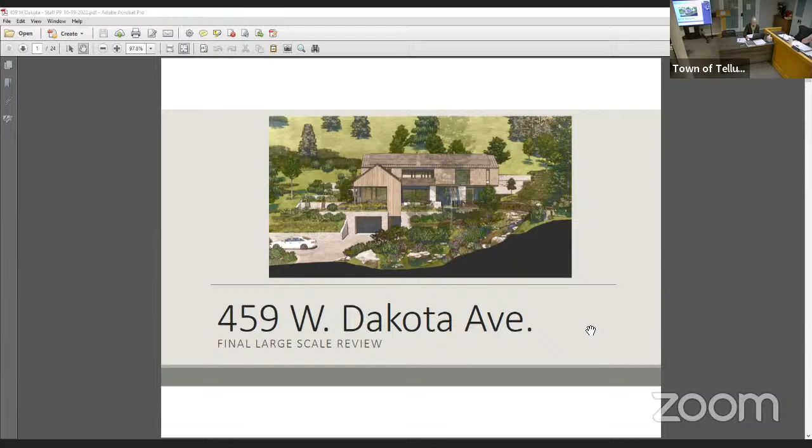So I will orient you to the site, which is located on the north side of Dakota Avenue, adjacent to Cornet Creek. It is outside the historic landmark district, inside the historic preservation overlay district. The zone district is hillside transitional, and the treatment area is transitional hillside with River Park corridor overlay because of its adjacency to Cornet Creek. Also because of its adjacency to Cornet Creek, there is a 25-foot wetland setback, which has been approved by the planning director, and will be approved in a final state after HARC's approval of the final development.

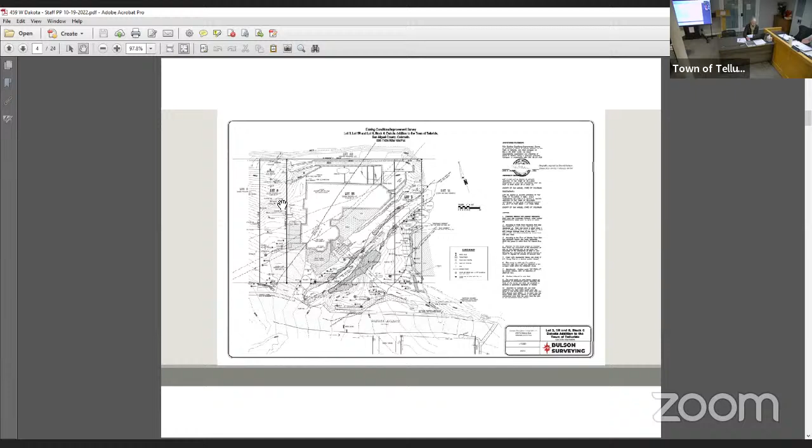There are 3 lots here, lot 3, lot 5R, and lot 8, which are all under the same ownership. In the new development plan, there are improvements planned for lot 8, which are more outdoor terraces and patios.

The existing house, known as the Nutmeg House, was built in 1987 and is not designated historic. It contains about 5,200 square feet of floor area, well over today's maximum allowed floor area of 4,000 square feet. The existing house encroaches into the wetlands along Cornet Creek. As fantastic as this house is, the architectural style and character probably wouldn't be approved under the current design guidelines if it were seeking HARC approval today.

So the proposal is to demolish the existing house and construct a new single-family house in its place with a similar but smaller footprint, respecting the wetland setback. The demolition of the house was approved on November 17th, 2021, subject to approval of the final development plan, which is what we're reviewing tonight. So there's no further action required for the demolition.

And the bridge over the creek, as it exists now, will remain. At the preliminary approval on November 17th, 2021, the application was approved with 11 conditions, which I will go through, starting with number 1.

If any trees are removed other than those shown, they will be subject to a tree removal permit and any required mitigation fees. There was some conversation about this in the applicant's revised narrative, which I'll talk about in just a minute, because this is a condition that has been retained.

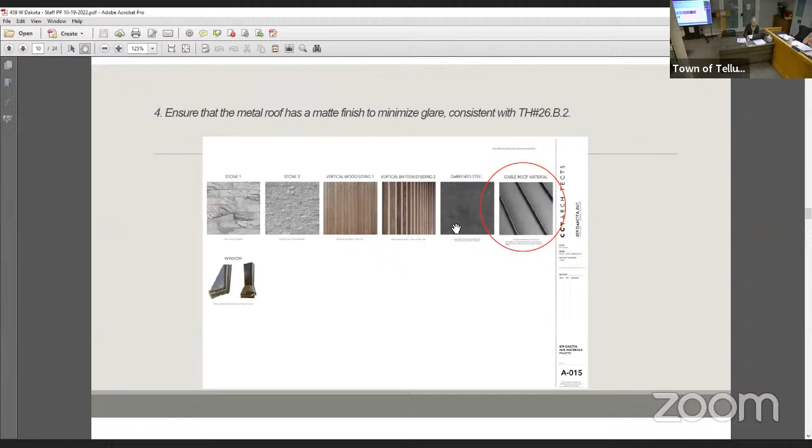Condition number 4 was to ensure that the metal roof has a matte finish to minimize glare. Previously, they had proposed a different material, zinc shingles, I believe. That's been revised to bonderized standing seam metal, which has a matte finish.

Condition number 6 was to revise the skylights so that they don't penetrate the ridge line. They did previously. The skylights have been moved onto the north slope of the roof so that it no longer penetrates the ridge. Condition number 7 was to revise the doors so that all doors are no more than 2/3 light. Details of the doors have been provided in the packet, and they are shown to be solid or no more than 2/3 light.

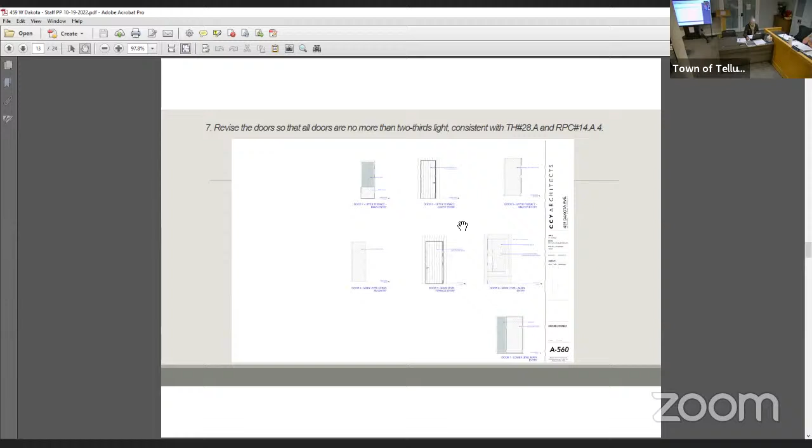Condition number 8 was to provide solid deck railings on the east side deck. Previously, it was an open, transparent railing. The amount of railing has been reduced, and the railing is now solid steel panels.

Condition number 9 was to incorporate traits of historic buildings in the town at large, such as eaves, overhangs, alternative roofing material, breaking up the ridge line, modifying the south building facade to become more traditional versus the cantilevered window.

Condition number 10 was to reduce the size and appearance of the driveway as seen from Dakota and add landscaping. As I mentioned before, it appears that some of the driveway maybe has been reduced, the pavers have been added, but there is a significant amount of landscaping proposed along Dakota Avenue between the street and the house.

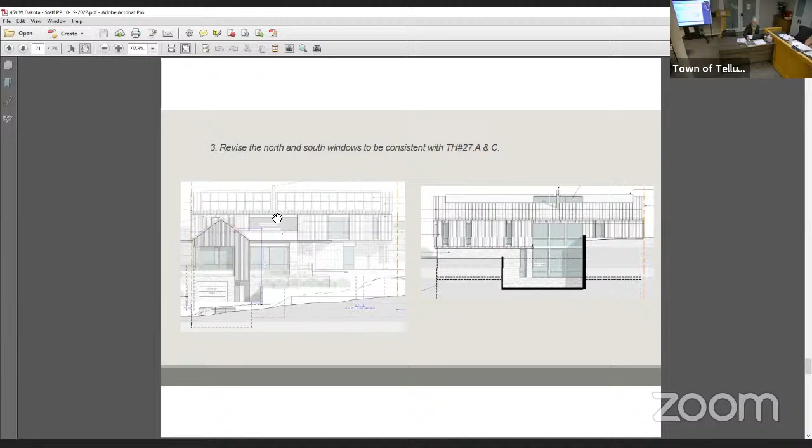Condition number 3 was to revise the north and south windows to be consistent with the guidelines. The applicants did a good job reducing the glazing on the east and west sides, but added it on the north and south sides. A large amount of glazing was added on the north, which won't be seen from town or Dakota, but will be seen from the Jud Wiebe Trail. Additional glazing was also added on the south, with an open covered deck on the south facade.

Condition number 4 was on upper level decks and balconies: change the can lights and wall sconces to step lights. Any fixtures above ground level should be step lights.

Condition number 5 was to use the lowest wattage light fixtures possible and as few fixtures as possible on the bridge and in the area of the creek, because it's in the River Park corridor overlay where there's great sensitivity to light spill. Condition number 6 was to limit the number of can lights at the garage. The guidelines recommend not duplicating fixtures to light the same area.

Condition number 7 was to ensure the solar panels do not extend above the ridge line. They did extend above it in the revised plan set I received a couple months ago, and I asked that they be lowered. I don't know if they were lowered or if ridge cap was added, so that should be clarified. It still appears the solar panel racks or frames extend above the ridge line, so I want to make sure that's addressed. Condition number 8 was to ensure the solar panel racks and frames are non-reflective.

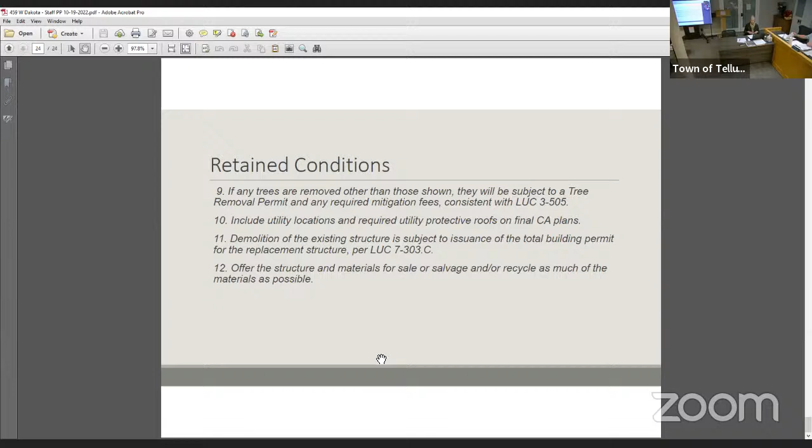Okay, questions for Jonna? Just go ahead and speak up. It's all quiet here, Mark. Yeah, I have one.

You mentioned it in the memo, back to our old condition number 9, which we will talk to them about, but it appears they did none of those five things. My real question is, even though there's not a ridge length maximum as in many districts, we asked them to break it up. I think we were going under the context of the neighborhood, being right next and adjacent to the historic district. Did that happen? I wondered why you didn't make that a continued condition — you suggested we talk to them about it, but did you not feel strongly about it?

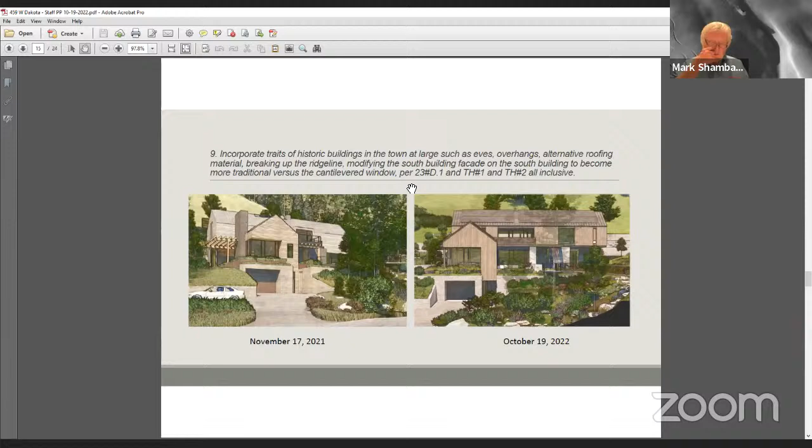I don't believe this was a staff condition at the preliminary review. I think it came out of HARC's discussion with the applicant, during deliberation, and from comments from the neighbors. As I mentioned, I feel the design is very specific and intended to be very contemporary. I think clearly the design intent is to keep it contemporary and not add eave overhangs or traditional materials, because that's not what they're going for.

So again, I hope you'll have that conversation. I'm sure that the applicants will talk about it as well. Okay, all right, well, unless somebody else has a question, let's move on.

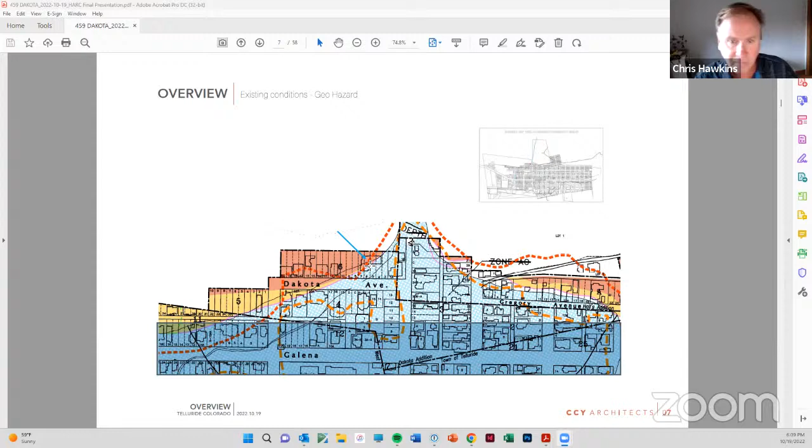So when you're looking at this, you can see a bit of the town's wetland setback applied, and then on top of that you've got the floodplain coming through the site, and rockfall in the back, which is easily mitigatable as we all know. What you end up with, if you look at the wetland setback and rockfall setbacks together, is a kind of triangular shaped lot that has really influenced the proposed cross gable design of the house.

So John went over all the nonconformities - the height greater than 40 feet, the floor area is about 2,000 square feet over, and it's non-conformant with floodplain and wetland regulations as well as HARC guidelines.

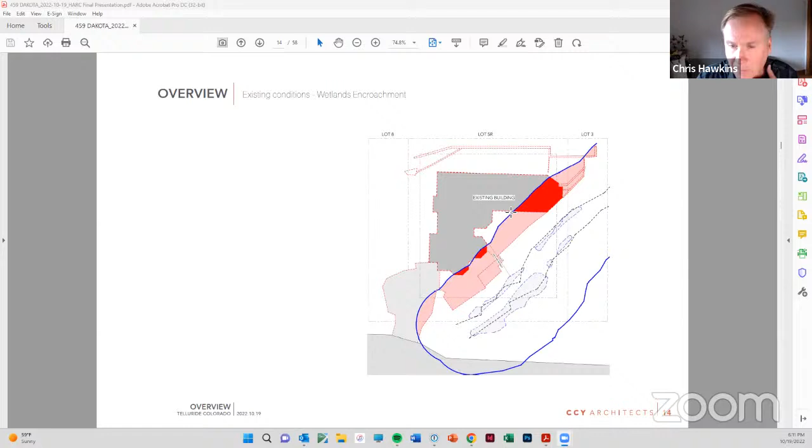These are the existing wetland setback encroachments, and the proposed house - this shows the existing encroachments, and then the proposed house is pulling this well outside the wetland setback area, creating a much better situation overall. Part of this was an approval already granted by town staff, where there's just a minor portion of the driveway encroaching here, a bridge, stormwater infiltration in this location, and some limited roof overhang. So under the proposed design, if you could please let Alex share his screen, I'm going to stop sharing.

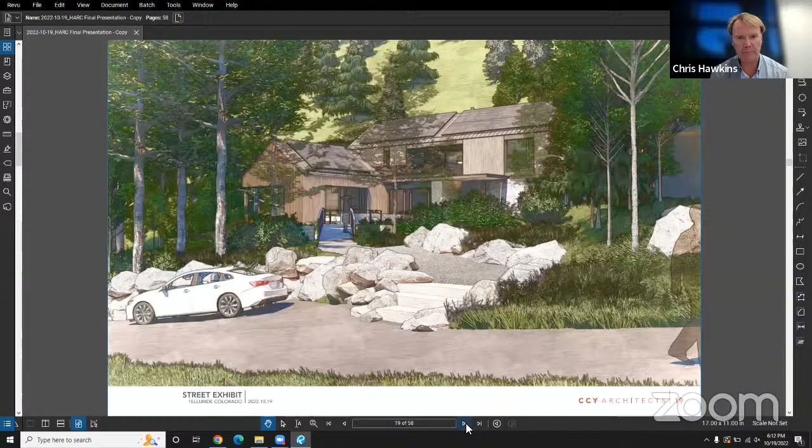The street view walking down Dakota, looking at the project. I think since preliminary, there have been a number of developments to the project. At the time there was quite a bit of discussion about level of character and interest, so we'll walk through a number of details later as far as how we addressed specific details. But largely, we're adding a lot of texture to the siding on the south, east and west ends of the gable, and breaking up the roof plane and ridges with the addition of solar panels and ridge caps, and the incorporation of eaves, rake details, and some window trim that we've looked at.

Maybe back up two real quick, Sean, if we could. I think one big development—all right, there we go.

That's perfect, next one. One big development that wasn't present at preliminary was the carving out of the deck on the upper form, which previously was a little bit stark. This adds quite a bit of depth and character to the building and breaks up the mass along that east-west portion of the gable.

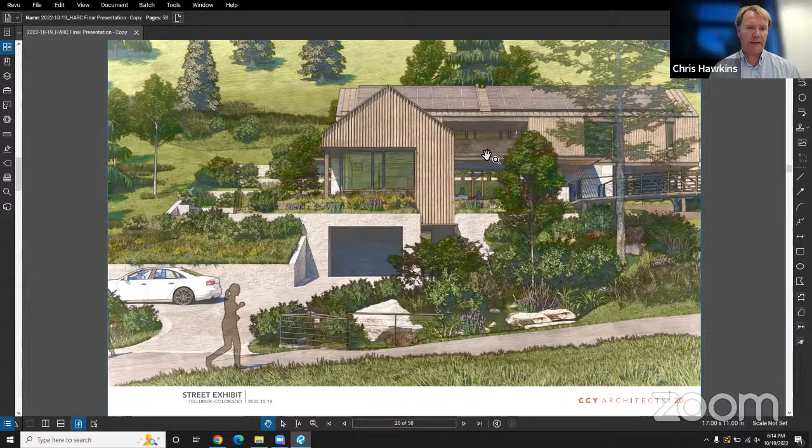Material-wise, I think similar to preliminary: a strong stone base locks to the earth, and more light tone woods for the upper portions of the gable. There are black accents in steel, and the roof is a bonderized standing seam, meant to be matte and neutral tones of gray, with matte solar panels making up quite a bit of the roof surface, but I think also adding interest and definition to the roof forms.

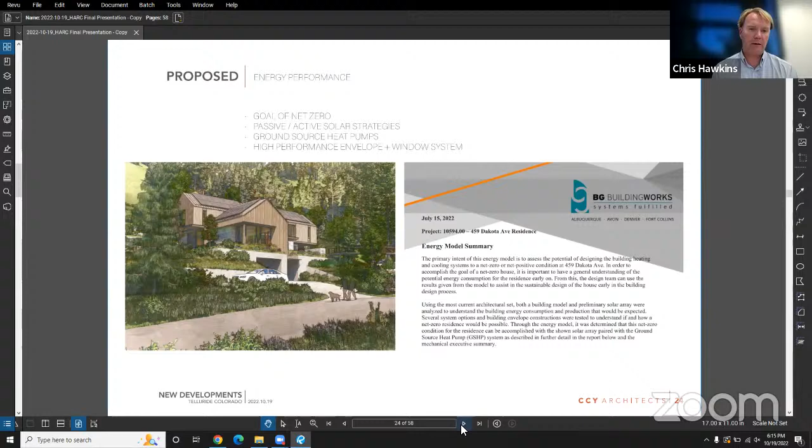I think I saw that Sheri is on to talk through some landscape developments. Or Sam. I think the clerk would have to allow them to speak for Sam. Yes, and she just did.

Hi, this is Sheri from Blue Green. Thank you for allowing us to speak about the landscape and planting design tonight. As part of final review, this is really the opportunity where we can present the planting design, though at our preliminary review we did present a lot of the design intent and the concept, which I think is really beautifully presented in these renderings: to incorporate native trees, including ones already on the site and within the creek corridor, shrubs and perennials, to really tie this home into the surrounding context and into the creek scape itself.

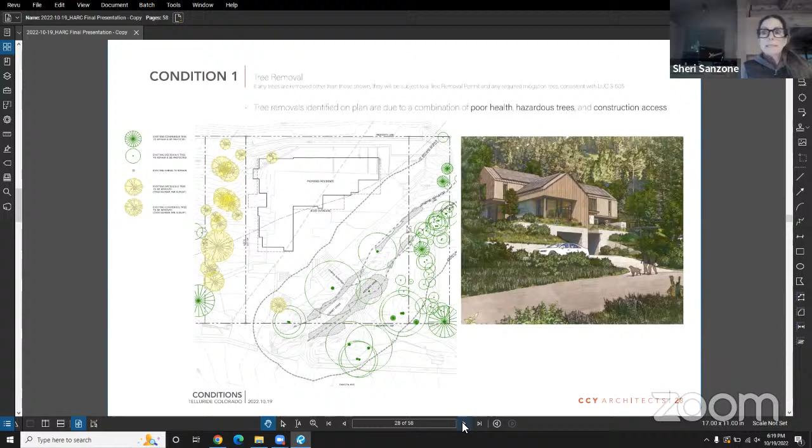Great. And then also as part of our more detailed review tonight, the topic of site drainage and how we comply with the code is one that we wanted to further elaborate. We described a design intent at our previous meeting which allowed for on-site drainage, so we're meeting that code requirement.

And as Jonna described, we looked at your suggestion for permeable pavers for the driveway and have incorporated those into our design, which is, thank you, our next slide. That's part of our pervious system as well to help treat water. So we're very excited by that.

Earlier tonight, Jonna asked if our driveway has increased in size. Basically, we've pushed and pulled the driveway footprint to best address both vehicle movement and foot traffic as one gets in and out of a vehicle or comes up the driveway to the lower secondary entrance. We feel like we've really maximized that, and we believe we're a wash. We might be 10 square feet over what we showed last time, but we're very close. If that's important, we can continue to look at that to get back down to the number we presented previously.

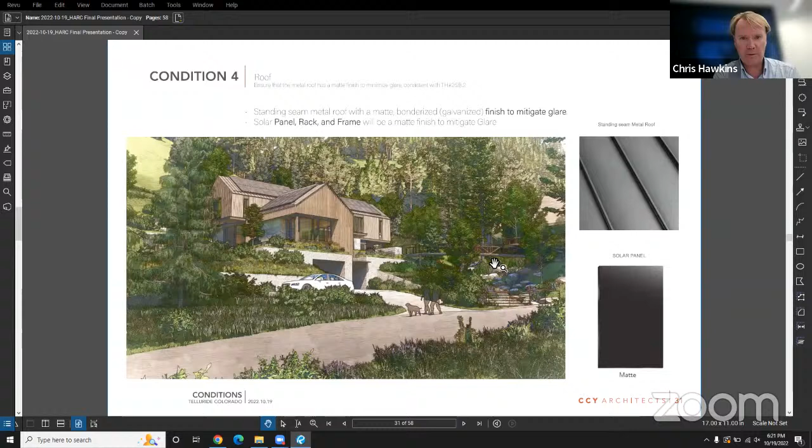Changing back to architectural features, condition 4 of our prior review was non-reflective roof materials. As I mentioned, we're committing to bonderized metal, as well as matte solar panels on the roof.

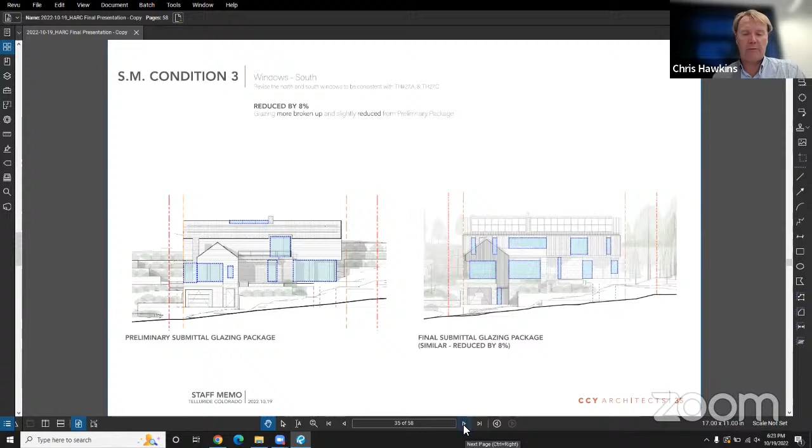We do think it's important to also talk about the north, and maybe even the next slide, Sean. So on the north there is a concentration of glass. I think in totality there's a 12% overall reduction from the glazing package previously. John did mention the additional glass on the north, so there is a concentration there, but especially given the steepness of the site and the location of the site walls, we're anticipating those site walls capture any light bleed from that glass on the north. Given the steepness of the site, it's a condition where it rarely will be seen—even from the Jud Wiebe Trail, you wouldn't necessarily get the view that's on the left.

The skylight, at the time of preliminary, broke the ridge. We've since slid that, as John mentioned, onto the north aspect of the roof, taking it off of the south.

Condition 7 was about two-thirds light doors. I think John had mentioned, right, we are now either all solid doors or committed to two-thirds light doors.

Guardrail on the deck on the right—thank you, Sean—that has moved to solid plate steel as opposed to previously an open rail. There's also a reduction in that deck, quite a substantial reduction. On the left, blue is what's proposed, and let's click back—red is what was included at preliminary. By recessing that deck, we were able to pull that deck edge back further from the road and Cornet Creek.

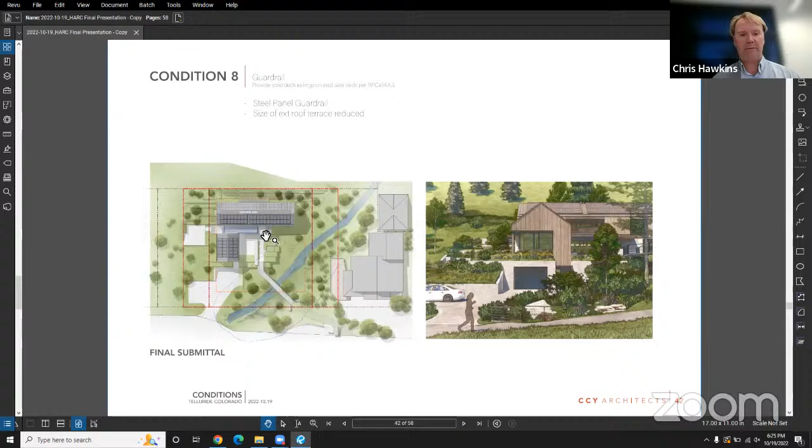So just a couple quick things on the character, right? We listened loud and clear to both some of the neighbor comments as well as the board comments on developing the character of the house.

We really took a good long look, liking the texture of some of the alley forms in town, as well as paying homage to the original design of the house, largely the existing log house. It's based on the texture of the logs, the texture of the window trim, and that type of thing. So we took that to heart.

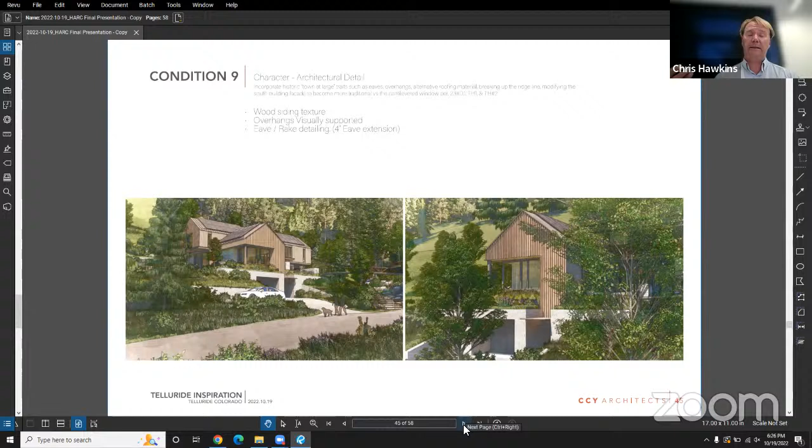We really looked at adding a number of areas of visual texture to the house, both in the siding on the gable ends, which has quite a bit of batten relief to it, to sort of take those alley textures in a way, but clean them up, trim them up, make them appropriate for a residential development.

And incorporating our eave detail that we mentioned, it's a current interpretation of an eave, not historic. As well, the rake of the roof, that textured siding really helps that rake of the roof read as an interesting detail. And like I mentioned, also the window detail in the center of the right image, that's a steel relief trim to add some depth and texture to the windows.

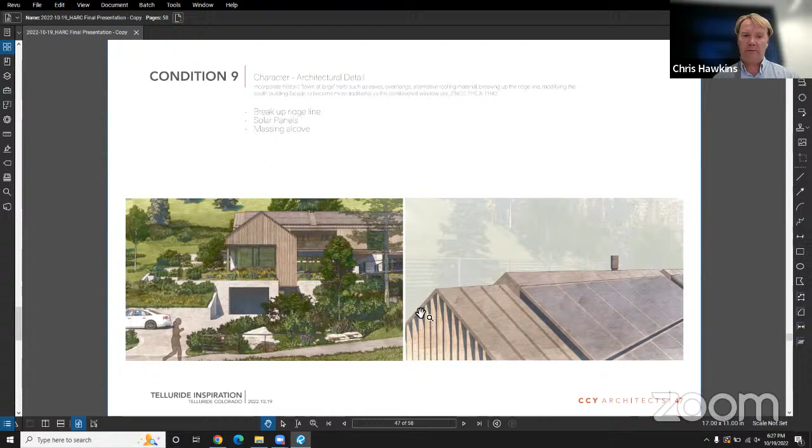So this is just a comparison of preliminary design on the left and then refined design on the right. We can see that alcove in the center we think is feeling very successful in creating some interest and intrigue for that portion of the home.

A couple other pieces to work through quickly. Staff memo, some of the proposed conditions that Jana had introduced. Stone, right? The concept is 2 types of stone on the house - basically from the main level down is the smaller coursed stone, more reminiscent of smaller assembled pieces of stone, and then above that there's a larger format version of the same stone.

Is that all granite? It's a gray. We don't have an exact species as of yet. Mark, right.

The wall distinction - if we read your memo correctly, Jana, I think what we included on the right was clarification that our wood siding is lifted up off the ground. So we've incorporated a 9-inch band of metal at the base so that wood siding doesn't meet the ground.

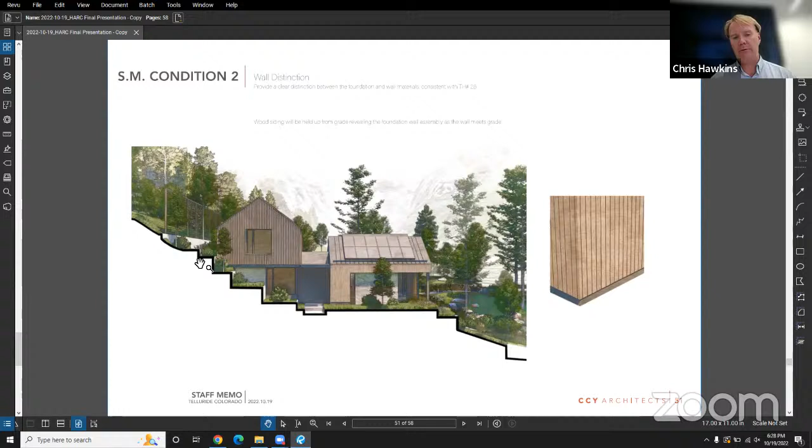Should we dive into lighting now, or do we want to leave it there and have discussion on those points so far, or should we keep going through lighting?

Well, tell us what you're going to do on number 4 to comply. Sure, so number 4 - the light fixture on the left was previously a wall sconce, and we're committing to a step light there.

Looking for board input on the 2 recessed fixtures, the downlights in the soffit. I think those certainly could move to wall sconces. I think a step light in that location with 2 doors entering that deck may not produce enough lumens. So we're looking for board input.

Can lights as well. It's just about the proper wattage.

Okay, so condition 5 was about the wattage of the light. I think we have very specific control over the lamps that go into these lights, so we comply with that. Is that 24 watts or less on the bridge and the open area around the creek? Correct, it is. All right, thank you.

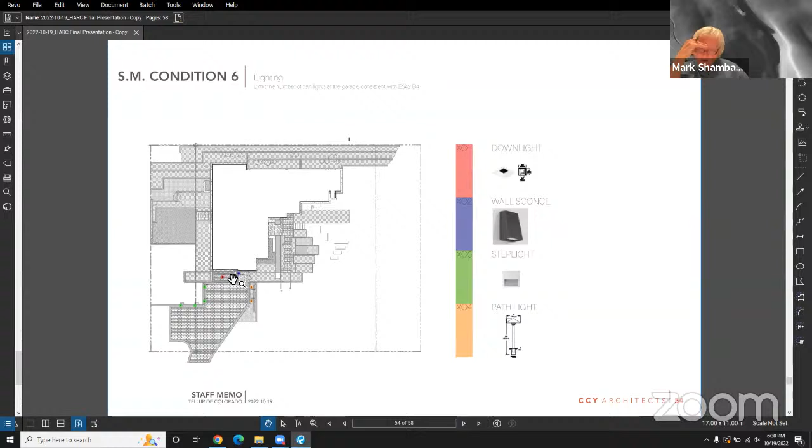And then I think there was a specific mention of the garage light. So right now we do have one downlight in the soffit above the garage doors, and I think that's a code requirement at a door. So we could look at a sconce there if that feels more appropriate, but keeping to a single light source is our intention.

Condition 7 and 8, I think the solar panels and non-reflective roofing are covered - no issues on these. And then 9, 10, and 11, I think all made sense to us as far as confirming that.

Lastly, commitment to salvaging as much as possible. Correct, and the letter on the right was from Paul Ricks on a deconstruction plan for the home and donation. So again, agreeing with condition 12.

Okay, that's what we got. Okay, questions, Rally?

Could we see the comparison of the preliminary and the final for the east elevation again, please? Yep.

Give us a moment. We're getting there.

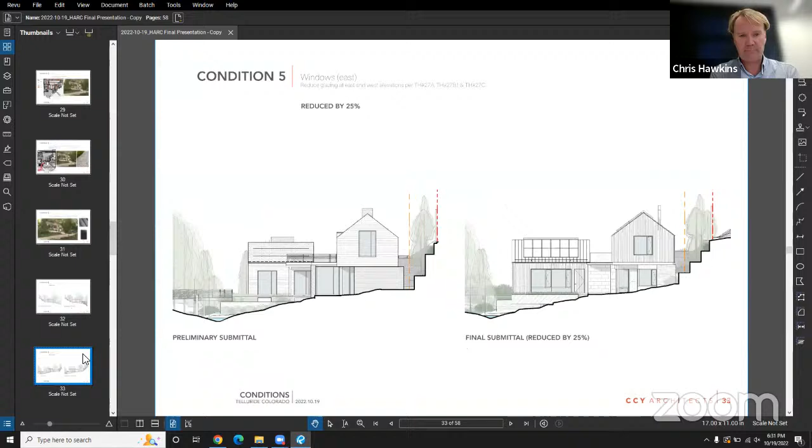So the deck shown on the preliminary between the two masses is no longer there. It's been moved further into the building. The deck previously extended further to the left to where the cursor is now, and has pulled back to the right to where the cursor is on the right image. So that's just over the connection between the two masses. Correct, yes.

Okay, thank you. I have a question, Mark. Go ahead, Matt. Chris or Alex, could you give us a measurement of the existing long roof ridge?

We're working on that, pulling that up for you. We can move on to other questions while they're pulling that up. Well, that was going to be mine. Okay, let me get you that info.

The old condition number 9 said to look at eaves and overhangs, and they've adjusted some things on the walls, and the eaves are contemporary, but breaking up the ridge line, I don't think they did. So I'm just curious what still could be done. I'm still troubled by that 75-foot mass.

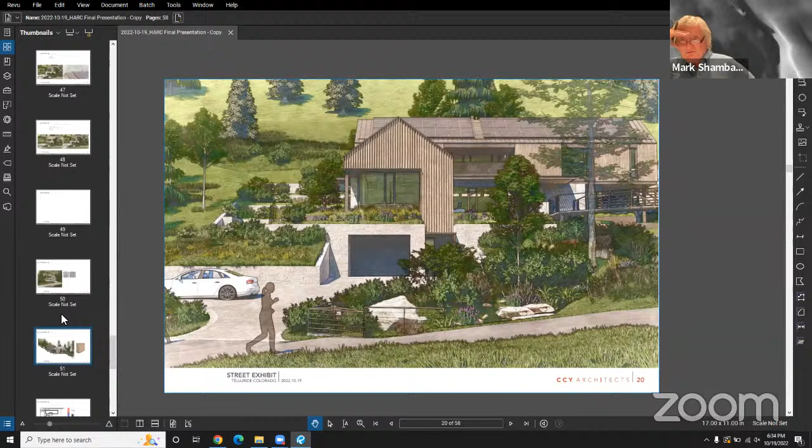I'd like the board's opinion on whether just putting some panels up there is really breaking up the ridge line. I don't know, I'd be interested in other people's opinion. But Matt, did you have another follow-up? I was just curious what the length of the existing roof is, it's quite long. I'm curious if they're proposing a roof length, regardless of the caps and solar panels, similar to what exists today or if it's different.

Great question, Matt. We can dig in the background here and try to get a length on the existing ridge today. Sorry, we don't have that, but on the new design it's still 75 feet. So while they're hunting that down, let's take other questions, as Matt suggested.

It's a good idea to just keep it going. Bob, could you address, on number 9, modifying the south building facade to become more traditional versus the cantilevered window?

Is that, I'm assuming, the large window on the west side of that building? It looks like it's been changed somewhat, but isn't it still a cornerless window, for lack of a better term? Yes, great point, sorry we glazed over that. So previously, on the preliminary as shown on screen, this was a true cantilevered corner with the structure hidden inside.

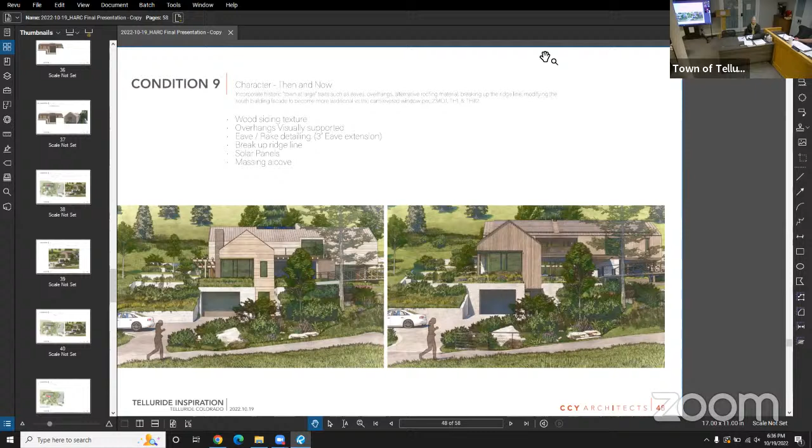Looks like there's a white element in between the column and the glass. So the glass is pulled in further as well. Correct, the glass was pulled to the right 30 inches. What we're seeing there in white is actually the sun hitting the fireplace mass beyond. We can look for a better corner view of that element to help describe it.

Or if you could zoom in on that right side on today's version, maybe that would help us a little bit. We have it in front of us in the packet, but still. Yep, there you go, that helps a little bit.

So Bob, there's some relief in receding, but that little column on the left, that's what was added new to give it a piece of structure, I guess. Right, and push the glass back. Correct, push the glass to the east. Yes, came to the right.

And you did say, or I'm sorry, the landscape architect, I don't recall her name, said that the driveway and parking area actually increased from what was shown before. About 10 square feet, she said.

About. And what the reason for that?

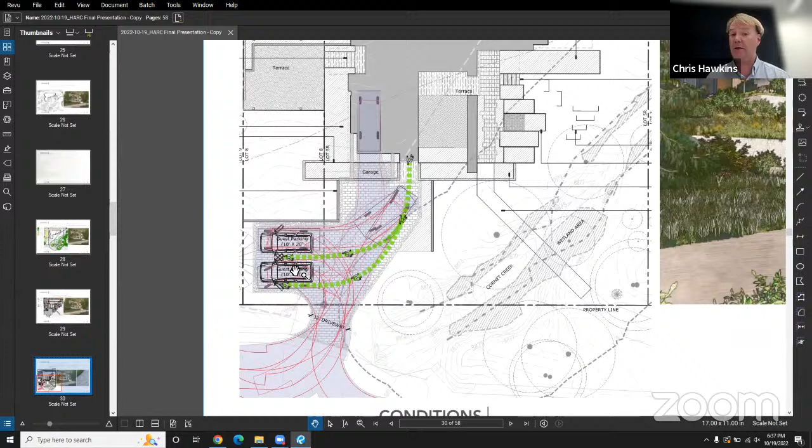If we go back to the turning radii, as we look at that diagram, this was a deeper dive with civil engineers to understand the turning motions of the cars and the vehicular turning. So while we hear you loud and clear on wanting to reduce that, these were our tests to make sure we were right-sizing it.

Did I do it? Good job, Sherry. All right.

So in checking the existing ridge length, going back to Matt's question, we're at 82 feet 9 inches is the existing ridge length of the home today. Okay, other questions?

Okay, if there are no other questions, let's hear from the public. So if you would electronically raise your hand if you would like to comment, now's the time. And I'm not seeing any. Piper, I don't see anybody, do you? I don't. Okay, all right, well then, seeing no public comment.

Thanks to the applicant, we'll go ahead and start deliberations. And as always, on 1 through 12, if you agree with all those, just let us know, and if you have any new ones, throw them on the table. So who would like to start?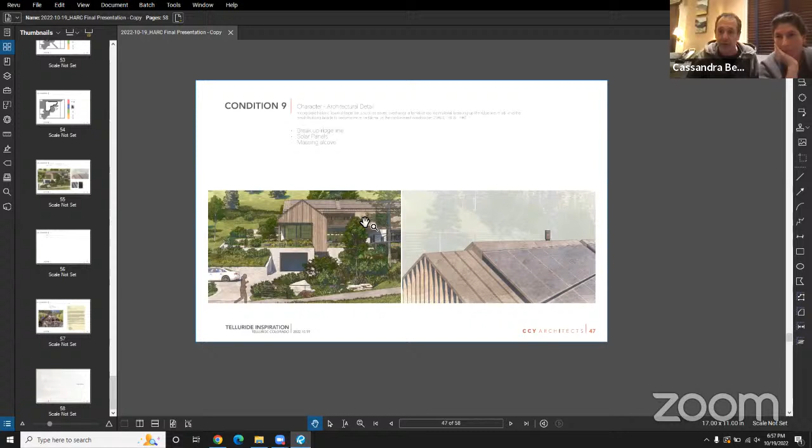All right, thank you. We understand your concern, and it's very close to approval now, so we'll go back to deliberation. I've got to ask if there's any other public comment. Are there any public comments? If so, raise your hand electronically. And if not, we'll finish our deliberations and make a motion here.

We last heard this in November of '21. I'm not sure what the delays were in getting to us, but we're here now. I think we agree it's approvable. I think we need to strengthen number 3, and I think we need to add a number 13. Again, there's nothing revolutionary about breaking up the ridge and reducing it; it's consistent with past rulings. That's one thing we take seriously, and we have asked for ridges to be broken up time and time again, so it's very consistent.

So does somebody want to try a motion? I'll try a motion, Mark. Okay, Matt. I move to approve the proposed final large-scale new construction at 459 West Dakota Avenue, lots 3, 5R, and 8, Block 6, Dakota Addition, based on the findings in the staff memo dated October 19th, 2022, with the following conditions. I'm going to try this 1 through 12 as stated, and I will open up for friendly amendments to address number 3 and the roof ridge.

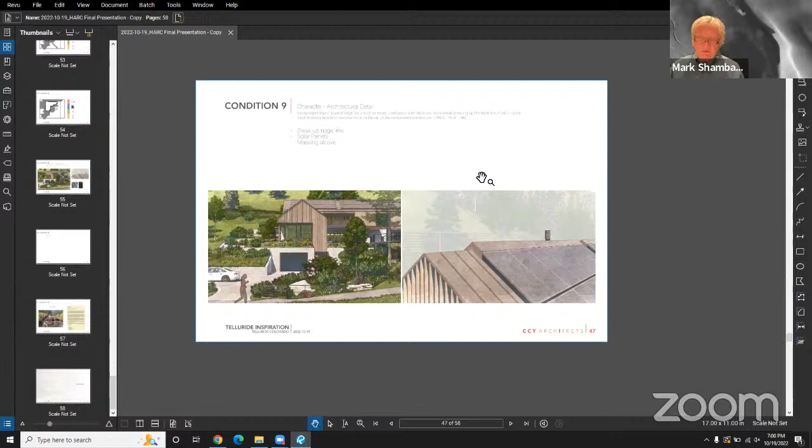Erica: Thank you. All right, this is the final large scale review at 400 West Pacific. Preliminary review was seen and approved at the June HARC meeting. It is in the historic residential zone district and the historic residential treatment area. It is located inside the historic district, and there are many rated structures in the vicinity.

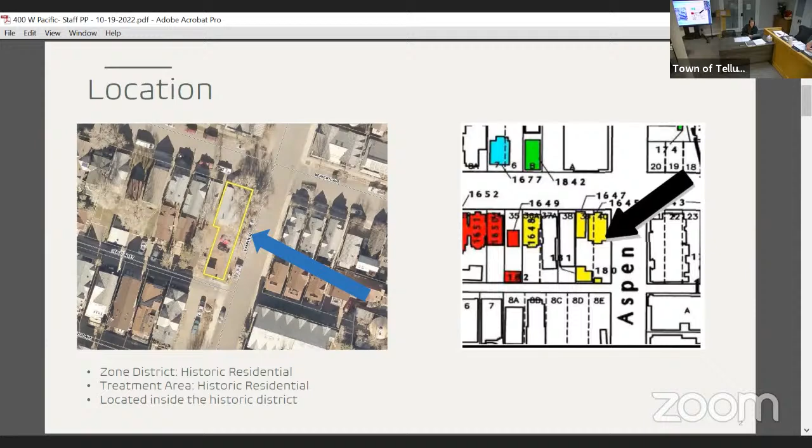The project description is the new construction of about a 1,500 square foot addition to the contributing house. Next we'll go through the conditions of preliminary approval from the June meeting.

Condition 1 was to provide a rehabilitation plan for the shed, including the treatment of historic materials illustrated on elevations, consistent with the rehabilitation standards and shed rehabilitation guide. A more detailed plan has been provided that staff is happy with. Condition 2 was to provide greater stepping down to the historic shed and street.

This condition has been retained. The overall height of the addition has been lowered, which does help with pedestrian scale and stepping down, but apart from the decks, there is no additional stepping down to the alley or historic shed.

Condition 3 was to revise the mass and scale to be not greater than the existing ridge height of the existing structure, and similar in mass and scale to historic structures found traditionally in the neighborhood. The ridge height on the addition is now the same height as the existing structure.

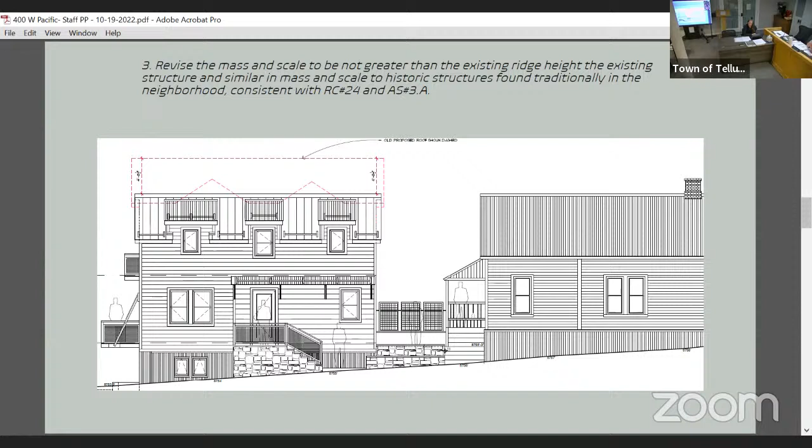Condition 4 was to install an approved protection device at the northeast corner of the historic shed. The protection device has been installed and has been indicated on the landscape plan.

Condition 5 was to increase the pitch of the roof to a minimum of 7.5 in 12 to match the historic principal structure. The main roof pitch is now 7.5 in 12, and the shed dormers are 4 in 12.

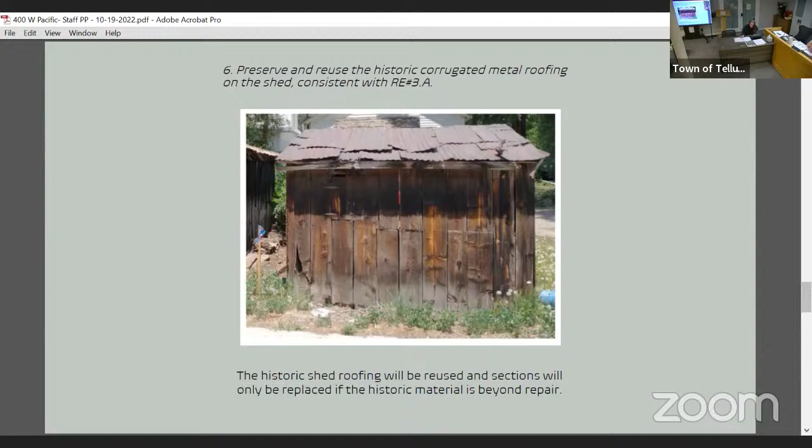Condition 6 was to preserve and reuse the historic corrugated metal roofing on the shed. The historic shed roofing will be reused and only replaced in sections if the historic material is beyond repair.

New proposed conditions. Condition 1 is to revise the windows on the west elevation to be a more traditional number and placement. The guidelines speak to placement and grouping of windows being similar to what was seen historically, and on the west elevation, it seems that the placement and grouping is rather untraditional, especially when compared to the historic house.

Condition 3 is to reduce the number of dormers, particularly on the east elevation. Dormers should be limited in size and number. The addition does have 5 dormers, with 3 on the highly visible east elevation.

Condition 2 was retained, which is to provide greater stepping down to the historic shed, alley, and street. Condition 4 is that the architect and contractor will meet on site with staff prior to the issuance of a building permit to discuss the shed rehabilitation plan. I'm happy to answer any questions before we hear from the applicant.

Okay, questions for Erica? I've got a question. Could you elaborate a little bit on number 2, as far as stepping down the structure? I think I brought this up at the last meeting. It seems to me that the new addition is 25 feet from the alley. So I'm curious if you could elaborate more on your concern about that. I could see the fact that it doesn't step down to the street, but with the alley, the decks, and the massing of the shed, it seems to me to step down. So could you give some more color on that?

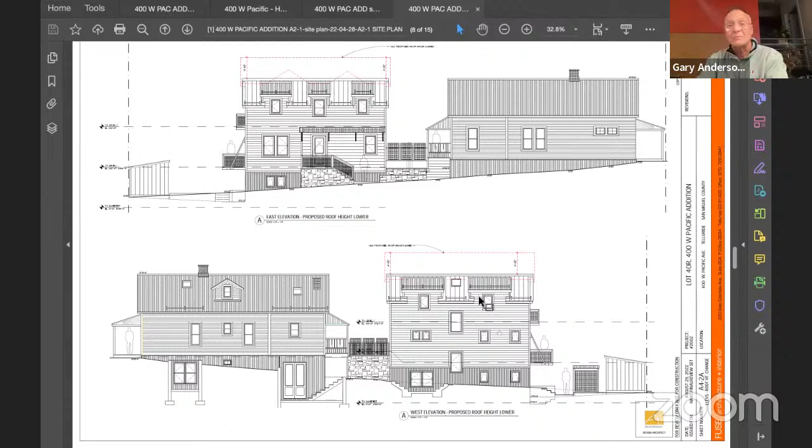So you heard my whole dribble about the placement of the windows, so I won't go over that again. I view them as windows that have been put into a barn where they need to be. There are fewer window types, slightly different proportions, because we want to bring as much light and natural air into the guts of the house as possible.

And to speed along back to where I thought I was showing you, this is a view of what you see from the public way. This is the barn at 406 that Dennis and I know very well, having been in and cleaned it out and discovered old motorcycles there. The view from the alley, a close-up view from the alley.

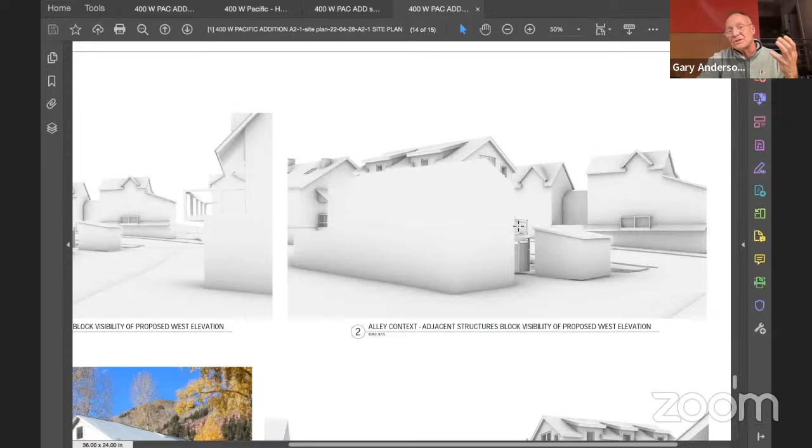Just a little bit later in the presentation, I want to mention this barn is important. It's an intermediate scale element that is proud, honest, and visible from Aspen Street. It creates almost a three-dimensional composition - it's a screen to the west side of the house, but also a three-dimensional element between the addition, the shed, and the alley. So that's my comment on the west elevation.

Do you have any questions before I go on to the next? No questions. Okay, I realize time is precious, so what I'd like to do, just to have an ordered presentation if possible, is go on to the dormer condition.

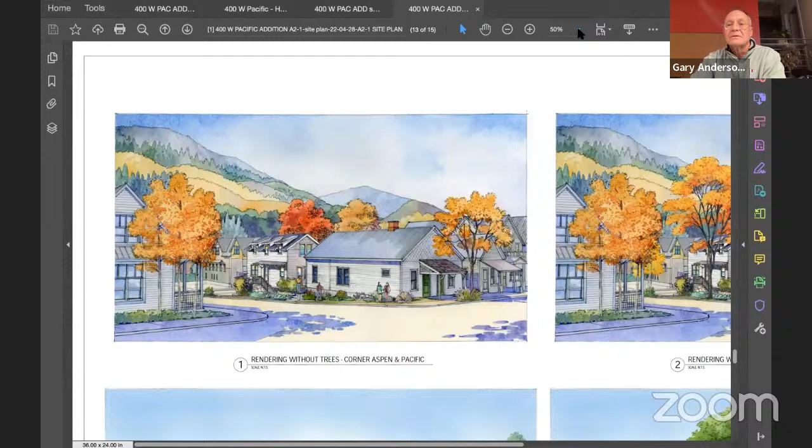You might not have seen these renderings, but I think this is a pretty good view - something that a lot of people will see when they walk from downtown.

We lowered the roof a lot. I mean, it wasn't easy, but the roof has been lowered over 4 foot 8.5 inches from the first time that you were kind enough to review it. We've lowered it to align with the ridge of the existing house by dropping 2 foot 7 5/8 inches, and we increased the slope of the roof to match that of 400 Front.

Dormers protrude in order to get any kind of usable space, with almost knee walls at the side. So what we tried to do was dormers that were simple, historic, simple horizontal shapes, very honest - not a gable shape, which raises an emphasis of verticality, but something that played well with the existing house. And once again, the great thing about the orientation of this house is east and west, but east isn't great if you can't get morning sun.

So the two dormers are for the bedrooms. The center dormer is to bring ventilation and light passively into the house and make it pleasant in the morning, and ideally to be a little perch for a window seat or a work-at-home desk.

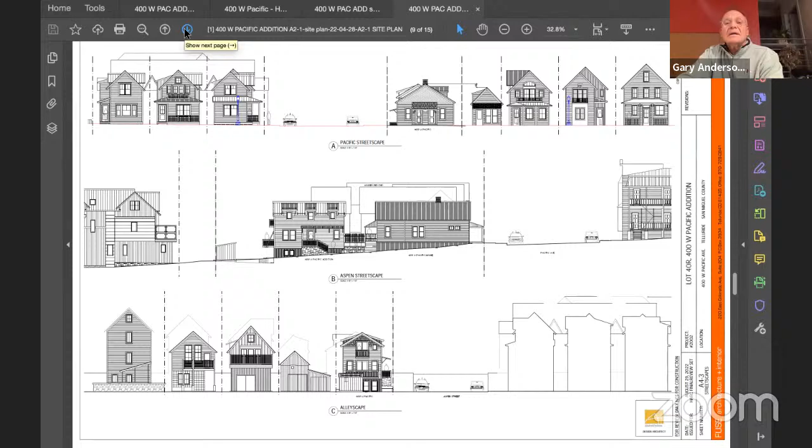Just one couple more images to refresh people's memory about this, which these are built conditions. These are the two houses that are directly - here's the barn, shed over here. These are the two additions that are taller than what we are requesting.

This is further down the alley, which is closer, taller yet. And another example, closer to the alley and taller. You all know these buildings, Peter worked on them. These are across Aspen Street.

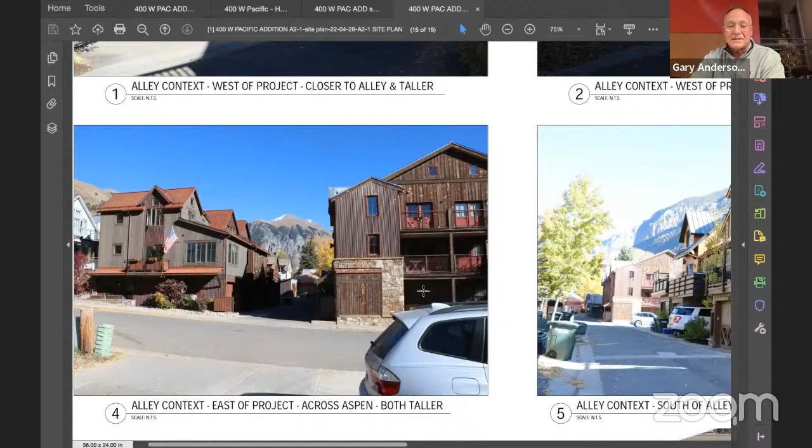The addition overlaps something like this that I'll show you in the aerial photograph. And then the bigger buildings that escalate down to the hotel with the many roof forms along.

And then this is the south side of the street - we don't know what's going to go in the southeast open lot directly behind, but this is what's along the street, which it's stepping down to the street, but it's not giving any elbow room. You have to crane your neck to see up.

And then just as one final comparison, this is the plan overlaid in the historic district. This is what's surrounding it. These are the two houses I showed that are closer to the alley and taller, that don't have the benefit of a shed in front, don't have the benefit of a historic barn out to the property line.

These are the houses that directly abut to the south. This is an older photograph, so it's not filled in. And then these are the houses that step down to the alley at the property line, but with full height here, which is midway through the setback of our house.

Thank you for your time, thank you for your patience. We've passionately worked on this. Dennis has been a dear friend, adventurer and patron for many years, and we're trying to do the best we possibly can for him. So if you have any questions, I'd be pleased to answer.

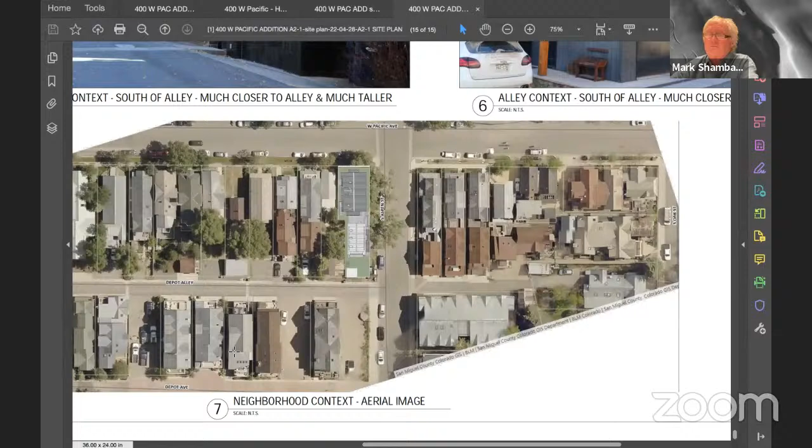As always, is there a consensus with Erica's items, conditions 1 through 4? If not, speak to it. And if there are any additional ones, this is a recommended vote for final approval here. I would - I'm sorry, Mark. Nope, go ahead. Number 2 and number 3.

I'm having difficulty when you look at this build. I did see the video, and I know this has gone through a number of iterations, and each one seemed to improve it. And I know Stacy mentioned in the last meeting that they addressed certain issues and created other issues with it as they proceeded.

This, I'll take the first one. I don't know how you could step this building any more than it is. It's pretty tiny, and you have the decks, you have the space between the sheds. So I can't see stepping it down anymore.

Do you recall we went on a bus tour some years ago? You were on it, yeah. And we stopped at - it's a greenhouse, I think it's on, might be Alder and Galena. And it has a garage and then 2 floors above it, all on the same plane with a deck. And I remember clearly that the interpretation at the time was that the deck doesn't necessarily break up that vertical plane of 3 floors. This is the same condition.

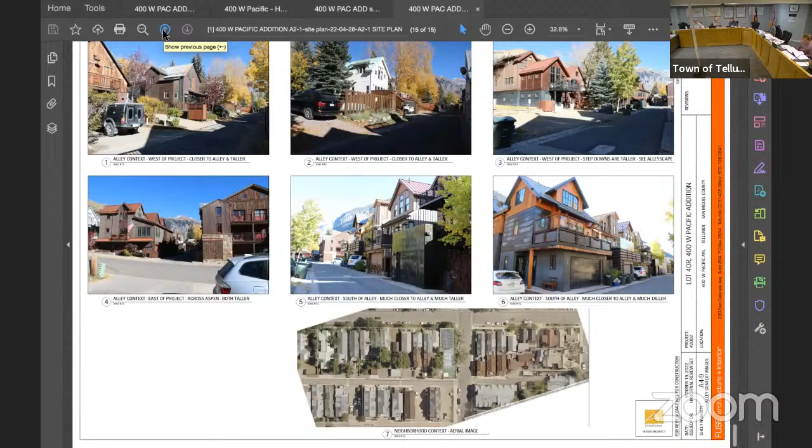And then the dormers, I don't know, I don't really have a problem with that. When you see this perspective down the street and look at what they're trying to do inside, I don't have an issue with it. I'm not as concerned either, and this is my reasoning. We did, based on the idea of subordinate to the historic principle, push that ridge down, like the applicant said, substantially.

Yeah, those still need to be functional spaces, and the way to do that is with these shed dormers, and they're not gable dormers, they're shed dormers. They're as respectful as they could possibly be. I mean, reduce it to 2. Take the one out of the middle of the stage. Yeah, well.

I mean, that would certainly do it, right? Yep, reduce it to 2, done, check. They could simply sort of mirror what they're doing on the... Are we trying to design this project for them? Or are we just gonna approve the 4 conditions and get on with it?

So, in light of Karen's comment, I could strike 2, leave 1, 3, and 4 in place and approve. I would agree with that. I actually would, slight change.

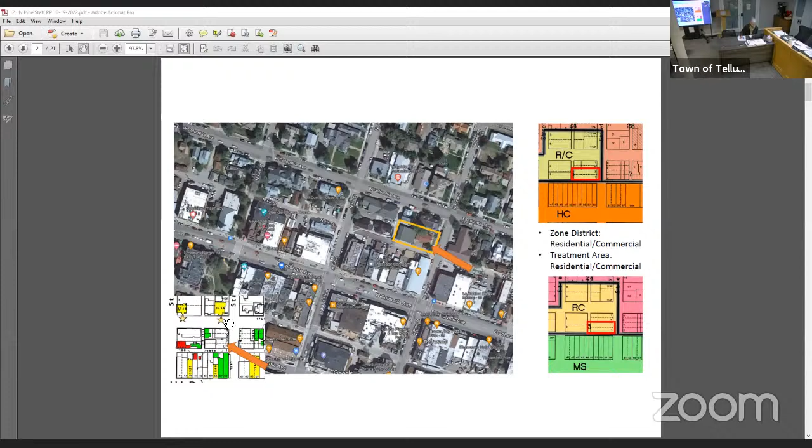It's in the residential commercial zone district and treatment area, but adjacent to both the historic residential and historic commercial zone districts, and historic residential and Main Street treatment areas. There are a few designated historic properties on the block, seen on the historic structures map. Currently on the site are a non-designated log cabin, built in 1938, and a non-historic storage barn, built in 1982. Both are to be demolished. The demolition was approved at the April 20th meeting, contingent on the approval of the final HARC application, so no further action is required to approve the demolition tonight. On July 20th, HARC approved the preliminary application with 13 conditions.

Condition number 1 was to further break up the massing along the south facade through stepping down to the west, providing relief in the wall planes and varying the materials from the east unit to the west unit.

The stepping down to the west, towards the rear alley, has not been significantly increased over time. It was slightly improved between the April and July proposals, but hasn't been significantly changed since July.

The materials along the south facade between the units and the 2-car garage have been revised and have helped break up the massing. The garage module appears more as a large connector, which helps break up the massing, and the garages have been further set back from the alley with overhangs, which help the pedestrian scale. But this condition has been retained to still try to help step it down a little more to the rear, to the west.

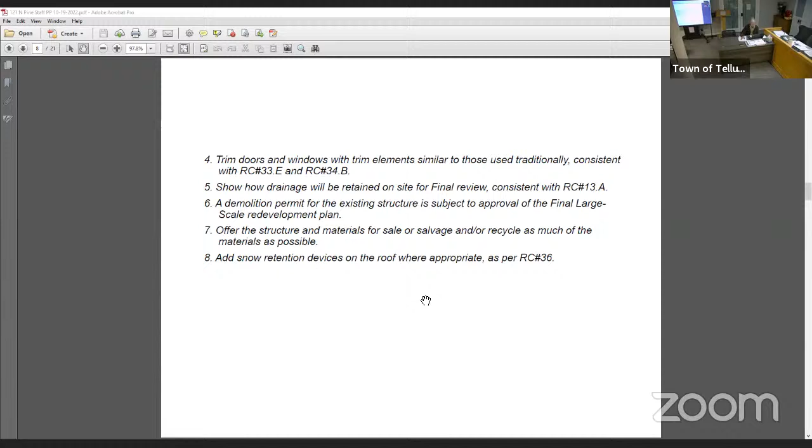Condition number 9 was to add a semi-transparent material to the bottom of the stairs per the neighbor's request. Previously, the material aligned with the stairs. That area has been more enclosed in the revisions.

Condition number 10 is to introduce gravel or pervious pavers to the alley rather than have continuous concrete. They have proposed pavers along the alley and the driveway.

Condition number 11 was to reduce the glazing on the east elevation on the first and second floors within the gables. Here's a comparison of the east elevations from the previous review. They have reduced the glazing quite a bit, especially in this south gable, and have also significantly reduced the windows in the gables.

Condition number 12 was to make the windows be of vertical proportion on the north elevation. Again, previously, these were the windows of concern. Those have been made more vertical.

Condition number 13 was to refine the materials and building form to enhance the pedestrian scale at the ground floor on the alley level at the southeast corner, which is at the intersection of the alley and Pine Street. So the materials and form have been refined to provide greater pedestrian scale at the southeast corner.

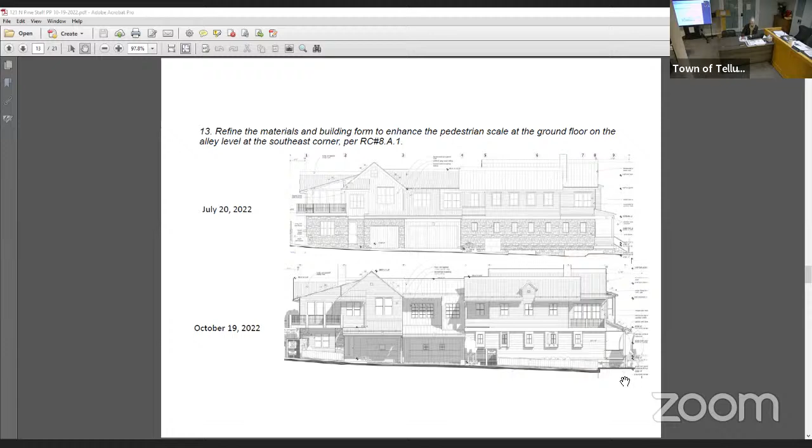The stone has been removed from the wall and limited to the foundation. The deck railing has been refined, as has the porch.

So, proposed new conditions for final review. Again, I mentioned number 1, I have retained. I don't feel that the stepping down towards the west has been accomplished as HARC had discussed at the previous meeting.

Condition number 2 is to reduce the southwest deck to be similar to those found traditionally and reduce the encroachments into the setback and southwest deck. I will say this deck has been significantly reduced. At the original review, it was at the property line. At the last review, it was reduced by about a foot. It still encroaches quite significantly into the setback, and at this corner are 2 rights of way, alleys on both sides, which I feel require that this encroachment be minimized or eliminated.

Condition number 3 is to revise the south facade to be similar in scale and character to existing alley structures. Again, I think this relates back to the stepping down towards the rear and to the alley.

This portion, I think, should be more similar in scale and character to alley structures. It's very residential. It has improved quite a bit in materials and treatment, but still doesn't feel like a traditional alley facade.

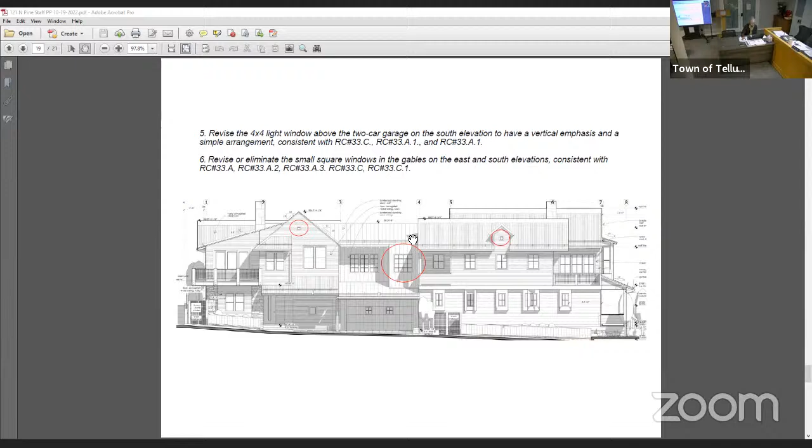Condition number 6 was to revise or eliminate the small square windows in the gables on the east and south elevations. Again, this may be a reaction to the request to reduce the glazing, but I do not know what the purpose of these is, and they are obviously not traditional in size or arrangement.

Condition number 7 is to reduce the size of the east-facing living room window to be of a traditional size and window to wall ratio. This window has been reduced; it was made more vertically oriented. The window sizes are still out of proportion to the window wall ratio and traditional window size.

Condition number 8 was to reduce the number of can lights on the front porch to avoid duplicating fixtures. I believe there are 6 can lights on the front porch and a sconce proposed.

Condition number 9, again, was to trim doors and windows with trim elements similar to those used traditionally. That was retained from before.

Provide a landscape plan and planting schedule with final CA plans. There is a landscape plan provided, but more specifics in a planting schedule would be helpful.

Condition 11, show the location of utilities - that was retained, and 12 and 13 were retained as well and have to do with the demolition. So I believe Bruce is with us from One Architects, and I'm happy to answer questions at this point.

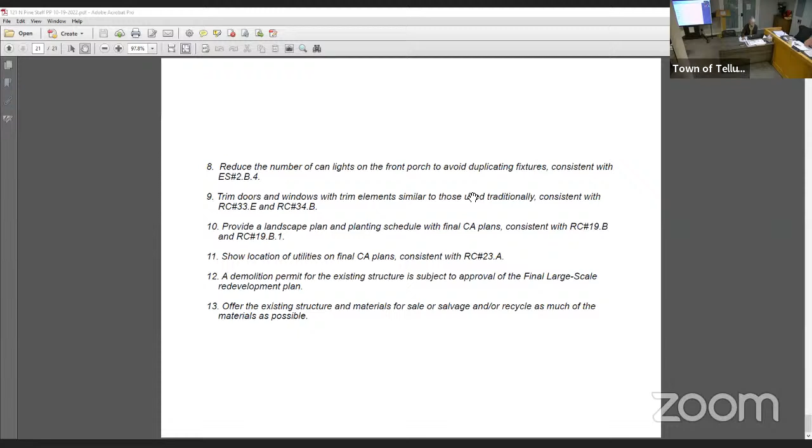John, I have one. Your new condition 1 and maintaining conditions 1 and 3 - were those the reasons you thought we might want to see it again, optionally as a continuance? Or if we stick with them, especially number 1, that's the hardest one to quantify here. Are you comfortable that if they do something to further step down, you can pass judgment that it complies more than it does now on that west end, without us being overly prescriptive?

Well, if it were to be approved tonight, you also will review the final CA plans with me. I think that HARC approved the preliminary application with that condition, assuming that you would see it again, and that other than that, the massing scale had been improved.

I won't be reviewing this myself if it's approved. Okay, yeah.

All right, well, the question is for you as well, if you're comfortable with a more specific condition, perhaps.

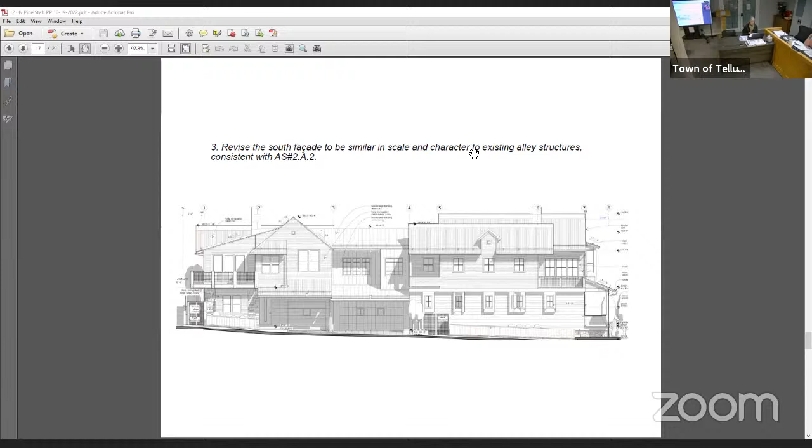Well, let's see where it goes.

Any other questions of Jonna? If not, we'll go ahead and hear from the applicant. Bruce, if you want to share your screen.

Stop. You guys hear me here? Yes, sir. Let's see here. I can share, let's see here. How are we doing this? Desktop one. Oh boy, this is going to be a big thing. I'm not prepared to share right now, and I don't know that we will.

It's telling me to open some system preferences and whatnot here. John, I don't know if you want to bring up the submittal, and I'll just go through and respond to the most current conditions. Let's see here, starting with the top, number 1, revising the mass to step down to the west.

We haven't stepped the height down. I feel like we've been concentrating our efforts on stepping down and breaking up the mass with what somebody called a connector, which it kind of is. So there's sort of the main house that's on the east, then there's this connector piece that we kept massaging, and we kept pushing the garage plane back and the master bed back. We've changed the roof over the garage to make it more pedestrian friendly and create more, I would say, less wall space, more shadow lines.

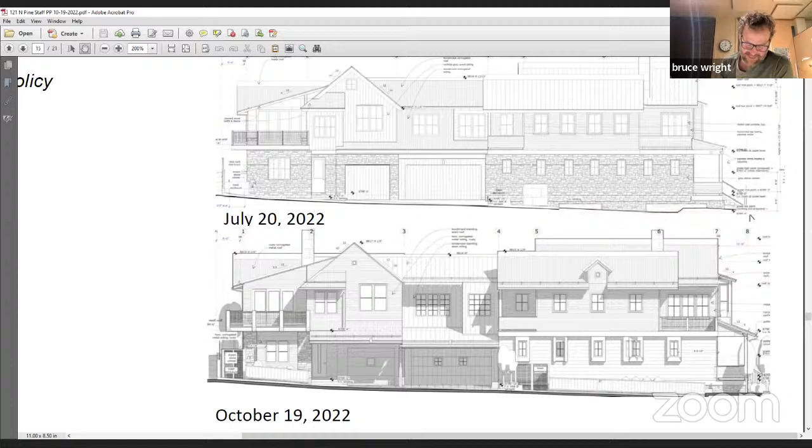But I was going to rely on most of that to keep the massing down. So we'd be looking for more direction, specifically on what it would take to get you comfortable with that west unit, while keeping it livable and accessible. So number 2, the southwest deck condition—I just spoke to that, we can reduce it. Number 3, revise the south facade.

I feel like we've been working on that consistently with you. I always get a little frustrated because the design guidelines say keep it different from historic traditional, and basically 10 out of 10 times you come back and say make it more traditional—even when it says don't copy existing, be creative, don't duplicate, make it compatible—all those things get a little old. I'm not sure if you walk up and down this alley and look to the left, but those precedents are historic as well. I think we're following along in the same design guideline, and as you can see here, we're progressing to try to suit your flavor.

The projecting windows, I really like them on the south. They don't project out from the second floor—they actually project out to meet where the second floor is. And I really like the texture on it.

The windows on the north are merely to provide some symmetry to the architecture. They're not critical, and they don't look at anything important. They're probably going to be not translucent. So I would request that you guys see that as a fun pedestrian-based element that is a new take on a traditional detail.

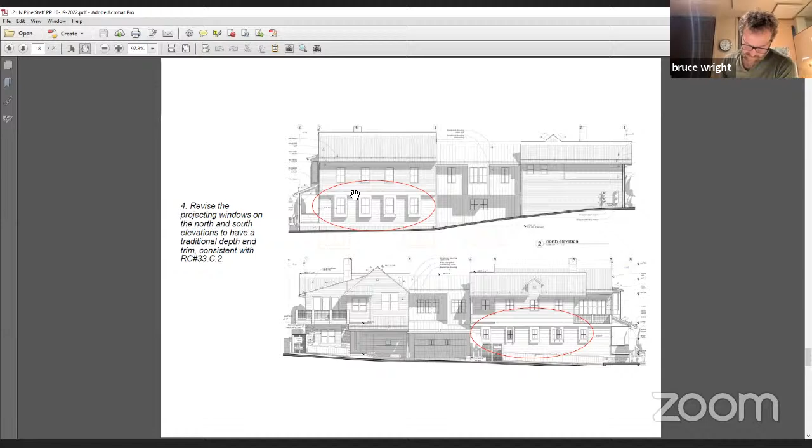The smaller square windows in the gables, that was a couple things. One, reducing the overall glazing—you're not going to get too much view out of those high windows. Two, it was sort of a fun, unique element distinguishing this from a historic building. We could make those even smaller and skinny and make them vertically oriented. I think that'd be kind of fun.

I thought on the inside of the house, it would be great to have sort of a beam of sunlight that came down where you can kind of track it—something to watch throughout the day. Who knows, you could stick your birthday on the wall where the sun hits it on your day of the year, something like that. Architecturally, I don't think this is going to confuse people or upset them, and hopefully it might be the opposite.

The living room windows facing east, I made them a little skinnier, and then we made them a little taller to make sure that they're vertical. We divided them into what would appear to be 4 vertical windows, even though it's only 2. I've seen this thing around, not in this specific district we're in, but not far from it. Obviously, we will reduce that and play with you guys until we're happy with it. I don't see that as a hang up.

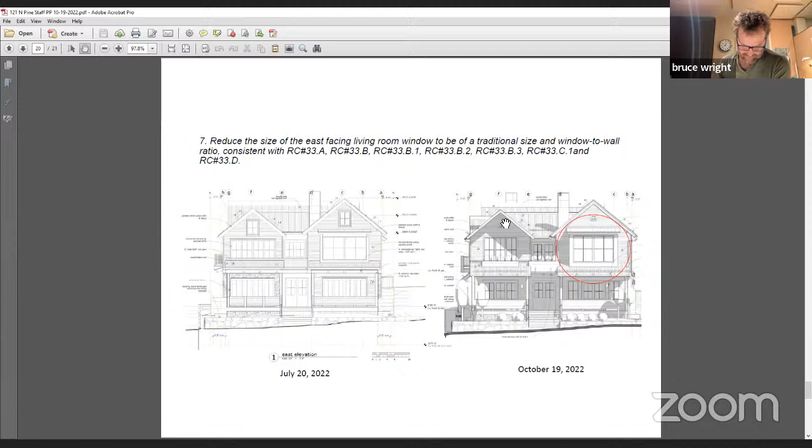And the rest of them are fine. Basically, the number of can lights, we can trim that down. The window and door trim, let us know what's going on. The landscape plan, detailing and schedules.

Primarily, that's it. I've got a list—I was trying to come back at you with some guidelines. I don't know that that would help, but there are lots of guidelines out there that ease up on some of the guidelines that make you guys want to make it more historic.

28D3, F, F1, F2, under the intro, 2A, 2A1, on the pedestrian scale, 8B, 8B1, 8C, 8D, 8E, architectural character, 28 intro, 28A, 28D3, 28E, E1, 28F—I already did those. And RC 30A3. I know you don't know all those things, but I'm just trying to present that there's an option for you guys to not go the entirely historic copying route.

Otherwise, I would love to gain confidence and know that we can work on this between whatever at the CA chair level. I'm confident we can. If you're scared that we can't, obviously, then you can't. Thank you.

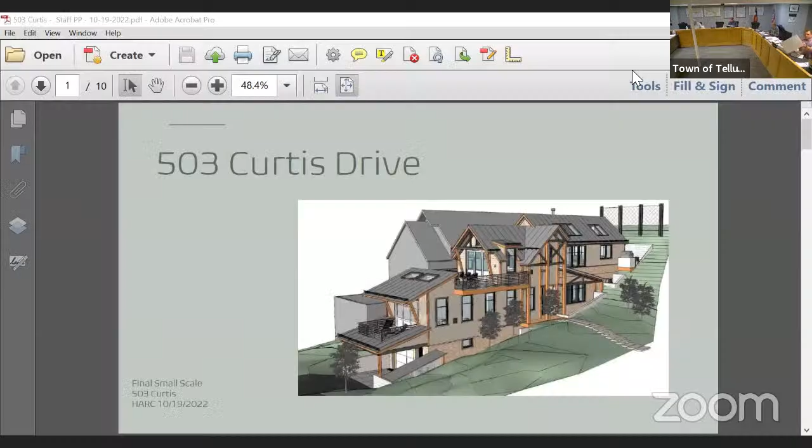All right, let's roll on to the fourth and final hearing item for the evening. Project title is 503 Curtis. Summary: consideration of a small scale new construction in the residential zone district, located outside the THLP within the HPOD, containing 1,500 square feet or more of floor area but not more than 2,500 square feet of floor area per LUC 7-203B.1.b. Legal description is Lot 1, Block 5, Cody Addition to the Town of Telluride, according to the plat recorded July 20th, 1901, in plat book 28, page 22, San Miguel, State of Colorado. Address 503 Curtis Drive, Zone District Residential. Owner 339 North Townsend LLC. Applicants are Alpine Planning LLC and Behind Architects. Staff member Erica Jensen. Thank you.

We are here for the final small scale review at 503 Curtis Drive. We received public comment from Dan Goodall and Billy Nelson. Did everyone have time to review those comments? I would like to remind HARC to only review things within their purview. This project is located on a corner lot fronting on Curtis Drive with North Townsend to the east. It is a relatively steep lot with no existing structures and little vegetation. It is in the residential zone district and in the hillside transitional treatment area, and outside the historic district, but it does abut it. The project description is for small scale new construction of a 2,078 square foot structure.

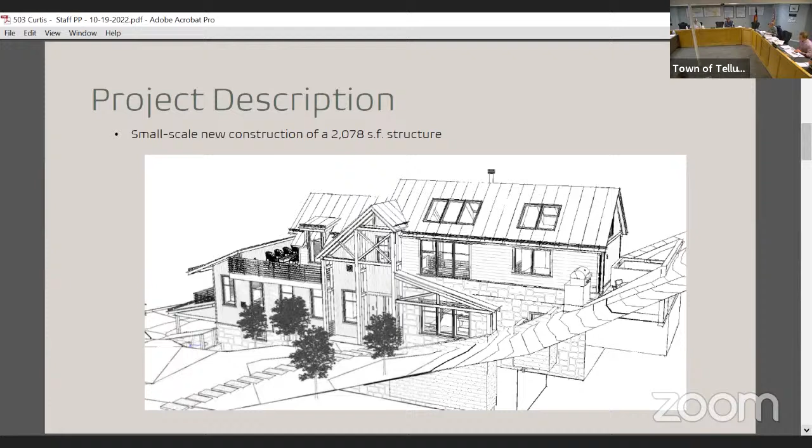Condition 1 is to further define the pedestrian entrance on Curtis and simplify the pedestrian entrance on Townsend. The proposed building does not maintain the traditional building orientation. It appears the primary pedestrian entrance is located off Townsend, with a secondary entrance off of Curtis. The Townsend entrance is rather elaborate and makes it appear that the main entrance and building should front on Townsend when it actually fronts on Curtis.

Condition 2 is to revise the second level shed roof form to be of a more traditional design. The second level shed roof is rather untraditional as it does not attach to any other building form and is a different pitch from the shed roof below. The guidelines encourage roof forms similar to those found in established residential areas, and while shed roofs are a traditional roof form, it is the lack of attachment to a building form that makes this untraditional.

Condition 3 is to revise the timber columns to be painted or stained for a more finished appearance. While the list of building materials does specify that the timbers are finished with an amber stain, they still have an appearance of being unfinished. This would be more appropriate for an alley or secondary structure, but not on the primary structure.

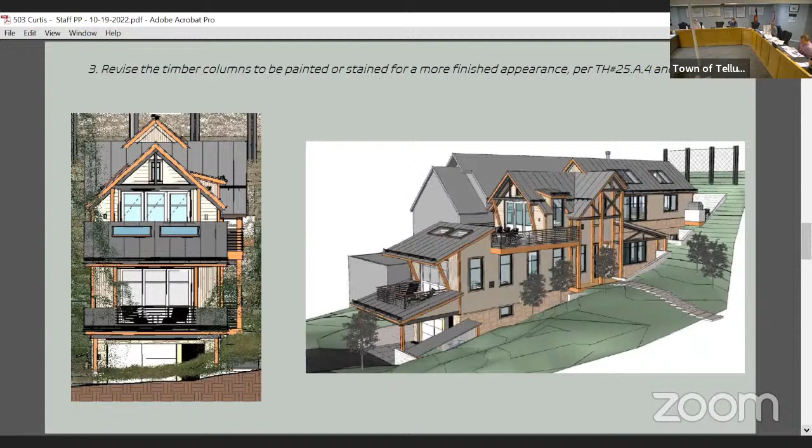Condition 4 is to reduce the amount of glazing on the east elevation. The amount of glazing on the east elevation does cause concern over light spill.

Condition 5 is to significantly reduce the number of skylights, and condition 6 is to remove the 2 skylights on the second level shed roof. The house has 11 proposed skylights, which does not align with the design guidelines, which encourage skylights to be limited in number and placed in locations that minimize visibility. The 2 skylights on the second level shed roof are highly visible.

Condition 7 is to ensure that all doors are 2/3 light. Condition 8 is to add snow guard brakes or other devices to the west side of the roof to prevent snow and ice shedding onto adjacent properties. Condition 9 is to remove the sconces on upper level decks as those are not allowed.

I have added 2 additional conditions after discussing the easement with Public Works. Condition 10 is that no trees or shrubs may be planted in the easement. Condition 11 is that the applicant must work with Public Works prior to the issuance of a building permit to ensure that their driveway is compliant with town requirements. I'm happy to answer any questions before we hear from the applicants who are both on Zoom.

I have just a quick question. Remove the 2 skylights from the second level shed roof - did you mean the one that's considered level 1, the one that's over the very front of the building? Yes, that's the one you're referring to. So let's see, level 1, level 2 - it's actually the roof of level 1. Just to make sure that's the ones you're talking about, the ones that face Curtis. Yes, yep.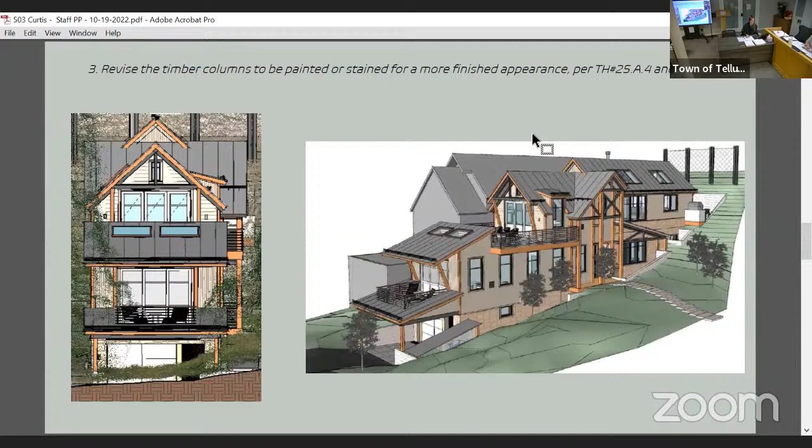Any other questions for Erica? Now let's go ahead and turn it over to Tommy and Chris.

Thank you. Good evening, Chris Hawkins with Alpine Planning. Erica, could you please email me those letters that you referenced earlier? Because we didn't get a copy of those. Yes, I can. Thank you.

So thanks, we're glad to be in front of HARC this evening. The site's a fairly unique site in the town - some of you hopefully got up there to see it. It's actually a corner lot. The Townsend right of way proceeds up the hillside here, and the lot is again 25 feet wide down here. So when you're looking up through the lot as well, it truly is a corner lot, with the Townsend right of way here and Curtis Drive in the front.

As far as the site plan itself, because it is a corner lot, the site design really incorporates 2 pedestrian entries - one from Townsend Street with a pedestrian entry on the side, and another from Curtis Drive, which is more of a secondary or primary entrance depending on who's coming to your house. I'll show you some images of those entries here in a second. There's a rock fall fence in the back, step down with retaining walls, a spa area, a home that steps down the hillside, and then the driveway overall.

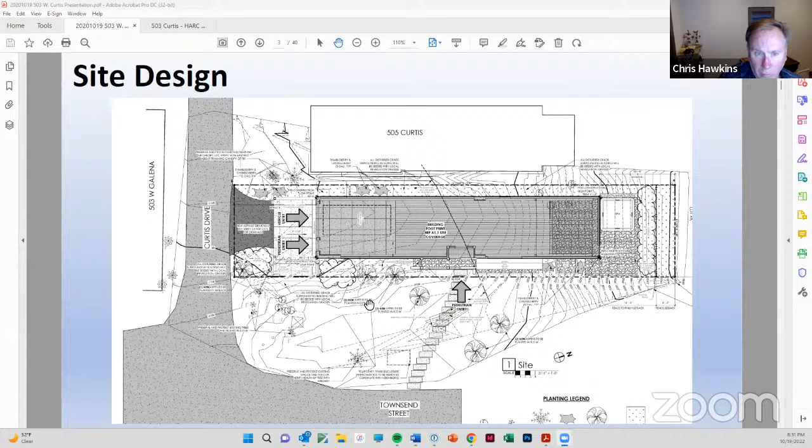As far as the design, it does step up the hillside quite a bit with various modules, and you can see the retaining wall designs. If you have any questions, I'd be glad to answer them. There's a little trash service area off to the side, and then a series of decks and shed roof forms, a little bit of a flat roof form behind a shed roof form, gable, all oriented to the town grid.

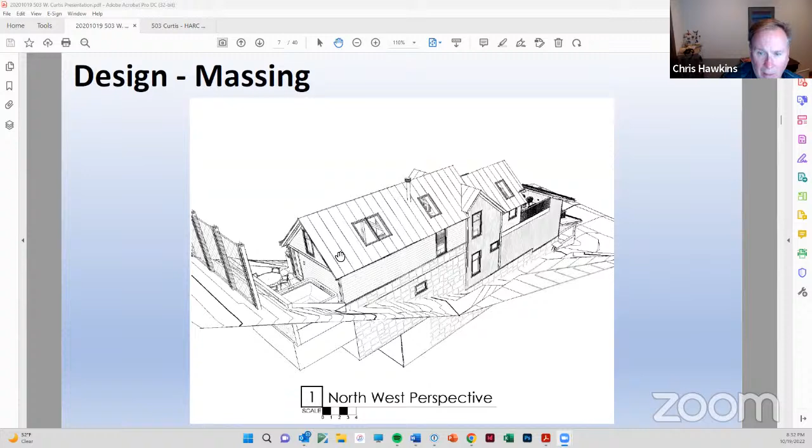This is just a massing view from the northwest. As far as the massing overall, if you look at the site, there is one home on this side. I'm not sure if that's who sent the letter, but that gentleman may or may not have made public comments. I'd like to respond if there were comments on it, but the massing is very much in line with that house. There are a lot of design elements in this house that show the stepping and keeping some of these views to the south from the home that exists in the area.

There's more of a front view of the house, again showing some of the design elements. The exterior material palette is fairly simple: wood, stone, metal, glass, kind of the typical palette with some board-form concrete elements.

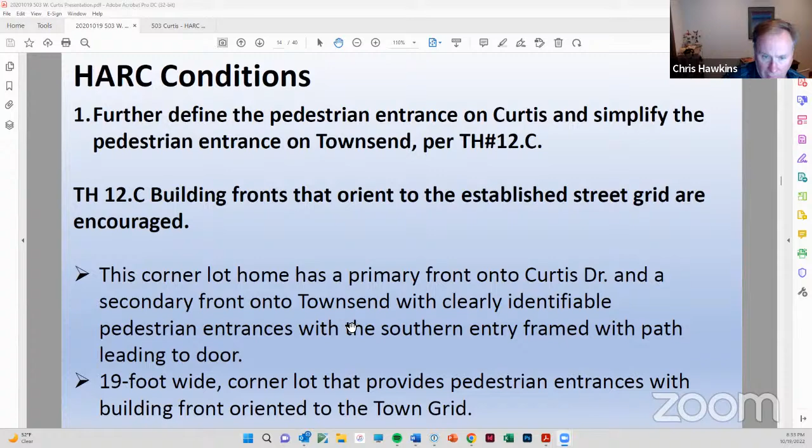We did want to get into the HARC conditions a bit, further define the pedestrian entrance. I always like going back to see what the design guidelines say. TH12C: building fronts that orient to the established street grid are encouraged. Again, it's a corner lot with two fronts, a primary front onto Curtis Drive and the other secondary front onto Townsend, which are clearly identifiable pedestrian entrances. The building front is oriented to the town grid. In the front elevation, there's clearly a front door oriented to the grid, and this is a side entry door coming off Townsend, up the path right there.

Condition 2: revise the second shed form to be more traditional.

Hey Chris, I just want to interject too. I think it's important to note, because it's a corner lot and still just a 25-foot lot, we had to deal with a 5-foot setback. So the massing on this is extremely narrow. We've tried to be creative along the east side to create a more traditional scale. Right now the typical width on a 25 is 19, and here we're down to 17. So I just wanted to point that out. We had to be a little creative because we only have a 17-foot wide facade, so we simplified some of these approaches purely out of scale, and the LUC requiring that 5-foot eastern setback.

So keep going, Chris. Okay, no, thanks, Tommy. I meant to bring that up, so thank you.

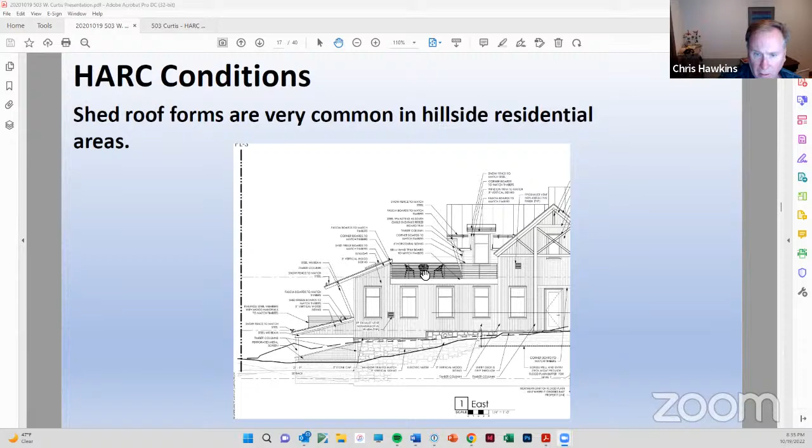Revising the second level shed roof form to be a more traditional design. Again, it says HR, but I'm assuming it's TH20B and TH20A: use roof forms similar to those found traditionally in the established residential areas, and it clearly contemplates shed roof forms like we have proposed. So we're a little confused on what the concern is there. Again, use roof forms seen traditionally in the area per TH20A, and shed roof forms are typical and appropriate. So we clearly have a shed roof design. I'm not sure what the concern here is, and getting some clarity on that would be helpful.

HARC condition 3: revise the timber columns. There's already been a conversation on this. TH25A4 and D state that exterior wood finishes should be painted or stained. It doesn't really say you have to use an opaque stain or a translucent stain or whatever. We are using probably a more semi-transparent stain to keep that rustic or natural finish, and it's considered, at least in this instance, appropriate in the area because it's outside the historic district. It's in a sloped area, the transitional hillside area. So we're hopeful you'll consider allowing this slightly different design to really show some heavy timber design on the home with a more natural finish.

Well, speaking to that a little more, Chris and Erica, we do appreciate your interpretations. I think we're taking this transitional hillside zone district and we'd like to integrate this particular block, especially moving toward more natural tones and a little more stone and timber because of the slope of the site. This whole block, because of the steepness, is really moving from transitional hillside into developing hillside. So I'm asking the HARC board to take a look at how our guidelines move from shallower sites to steeper sites, and how the roof forms and materials tend to get more rustic as we get steeper and move into the hillside.

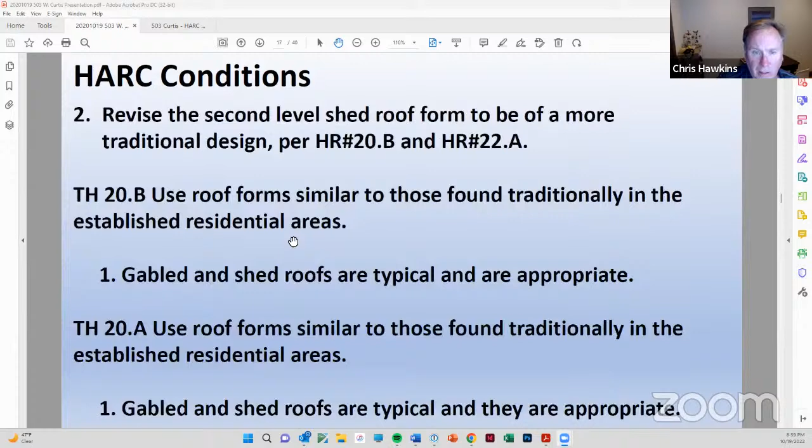The window and door area is approved on that south facade, and I want to go back to that briefly. This is a fairly common arrangement we're seeing with two-thirds light, sliding trifold doors. There's been some concern there, but I think Tommy has designed these at a fairly modest scale on the south elevation.

And certainly on the east elevation, we have a very traditional rectangular window pattern going across the facade, with some groupings of 3 rectangular windows, which we've seen approved in this area, and a grouping of 2 windows. So we're not really sure what the concern is on this facade, because it's not a huge amount of glass when you look across the whole facade, and it's a fairly good window-to-wall area ratio.

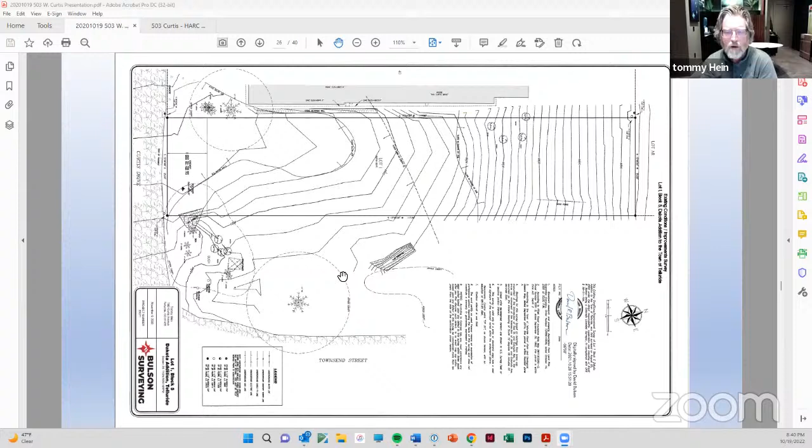So Tommy, did you have any concluding thoughts before we wrap up? No, I think that's it. Overall, I think it's a smaller house, and we tried to be creative in how we address the corner on such a narrow lot. The way we've used these timber elements and deck elements to break up the massing is a pretty interesting strategy. Overall, I think it does what we want in terms of the guidelines on some of these challenging lots still left in town.

So, thank you, glad to answer any questions. Great. Does anyone have questions? I just have a clarification question.

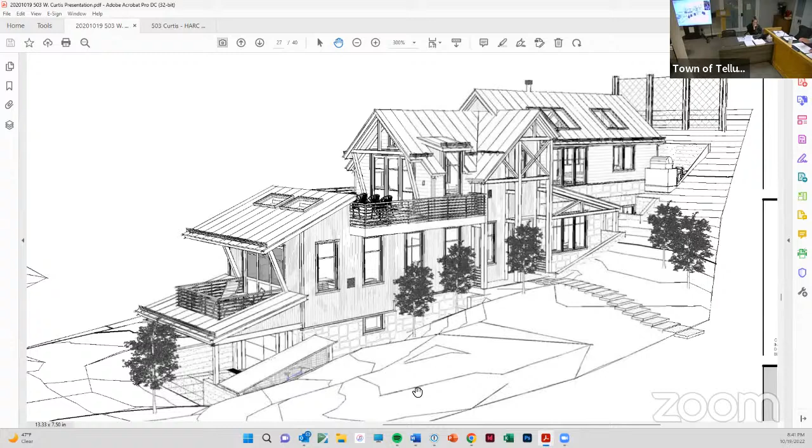So the land to the east of this lot, is that a town right of way? That's not another lot, is that correct? That is the Townsend right of way, correct. Yeah, it's a Townsend right of way, exactly.

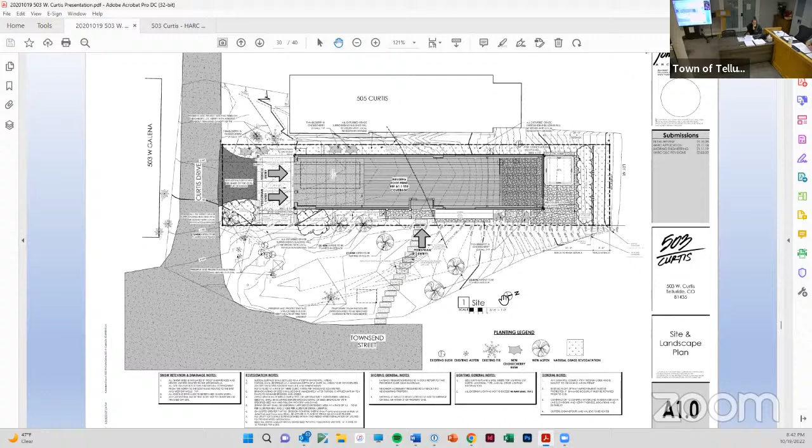And I walked up there today, and it appeared to me that the people at the end of Townsend, slightly to the east, were using that for their parking. I didn't see, I'm not sure that house even had parking, like a garage or a carport.

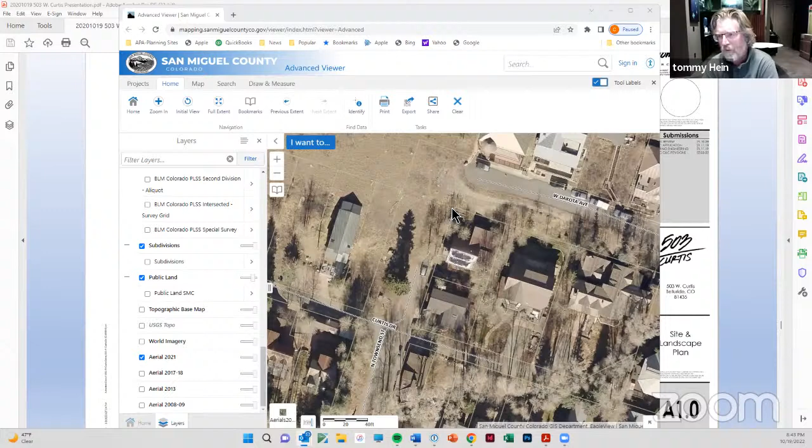What we're trying to do, Bob, is encourage people to use that end of Townsend rather than Curtis, since Curtis is so narrow. We've recessed our garage so you can get another car in the driveway below the carport. We were sensitive to this, and I've talked to these neighbors, including Bill Nelson, about making sure we had at least 2 tandem spots on site. We also created pedestrian access points from Townsend to further ease congestion onto narrow Curtis. So there's been quite a bit of thought put into how this will function and how we can minimize the impact to Curtis.

I'd really like to respond to the public comments, but I still don't have them in my email. So if we could get those emailed out. They're also here to make public comments, so we'll hear from them in a minute. Well, I guess we reserve the right to respond to those comments, please, Mr. Chairman. Yep, you always do.

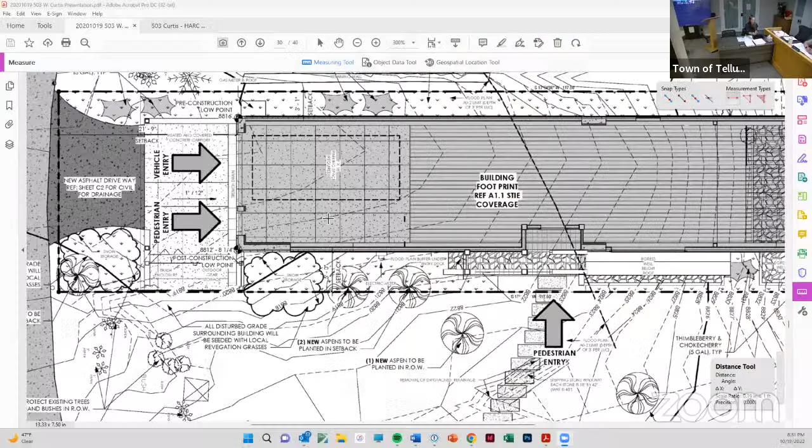So the 10-foot easement, yeah, there's some landscaping in it right now, but that's an easy removal, so that's an easy change and can just be added as a condition of approval. We get it, that's an easement of record that encumbers the property. To somehow put additional levels of regulations and requirements that aren't on this lot per the land use code, I'm not sure we can do that, like requiring 2 parking spaces when only one's required. I think that would be a pretty big stretch.

Besides that, there is additional parking here in the Townsend Street right of way. Even though these folks might be using it, they're only using 1 space and there's additional room for parking here if needed, so it's not going to be an issue as far as parking goes. I think it'd be a big ask, on a corner lot that's already encumbered by a 5-foot setback on this side and a 3-foot setback on that side, to now provide 2 parking spaces that are 16 feet wide, and we couldn't even have a front lower entry or egress. It's just physically impossible to do on this lot.

To even continue an item to have a fire district review for fire code, that already happens with the building permit. Again, I'm not seeing the need for adding regulations that aren't applicable on this lot. I'm not sure if Tommy has anything to add to that.

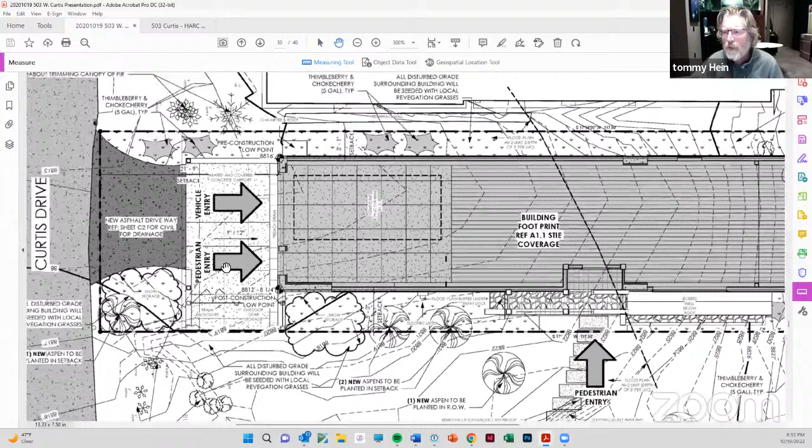Well, yeah, I do. Bill and Dan, what I need you guys to do, and I've talked to both of you about this, is we need to collectively approach town engineering on the other lots that I'm doing down the way. I'm very open to widening the street all the way down. I've actually had that in my previous submissions for the other houses, Bill. So I think this is more of a broader discussion of how do we make this wider the whole way. To me, it doesn't necessarily have to do with this lot.

I think it has to do with the whole block and how we address widening of the whole block. I've tried to have that discussion with Karen, I've tried, and so I could use your guys' help. The time to address the widening of the street is with those other applications, and to have you guys help me go to the town collectively with all the neighbors and say, hey, we'd like to widen Curtis the whole way. In that case, what we're doing here isn't preventing that from happening. It's just allowing us to respect what's there now, but still be able to accommodate any widening down the road.